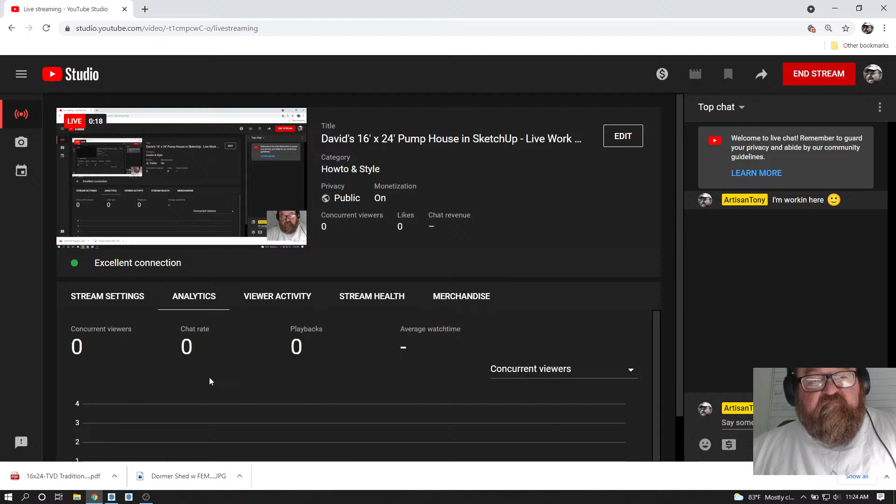So I've got to do this little pump house for David, and all he had was this kind of little sheet here. These paper drawings are kind of cool, and you can build by them, but it's much more fun and easier to plan if you have a model.

Much more fun. So what we're going to do is start out with Medeek's extensions here, because I like his extensions. Nathan Wilkinson's a really good guy, I've gotten to know him over the years, and he's an engineer who developed these extensions for SketchUp.

We're going to do a slab, and we're just going to come out here 24 feet. Ooh, what scale am I at? I'm way out here. Let's start over again. Let's just offset a line here. I must have been still in UFO mode or something. Let's go 24 feet. Oh yeah, we gotta zoom in way in.

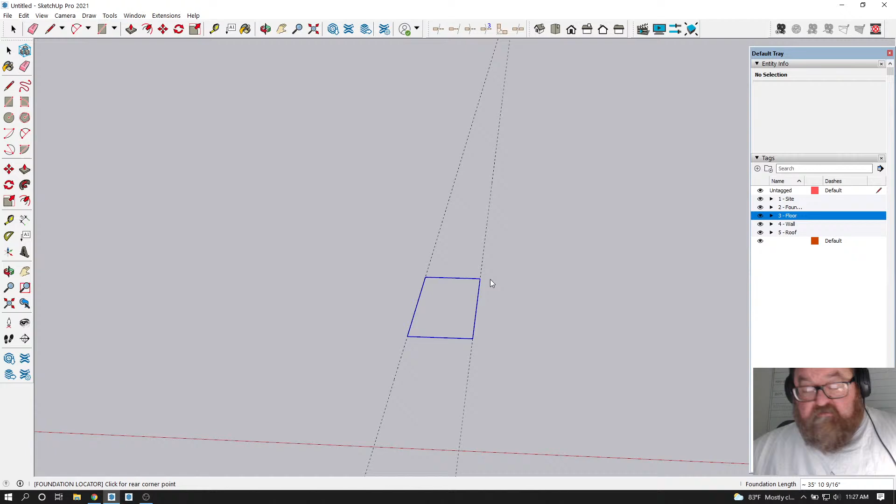So what we'll do is start over with our Nathan Wilkinson slab, and we'll do 24 feet. That would mean this is 16 feet. I was way zoomed out. That's ridiculous, isn't it? So we will start yet again. Is it Saturday morning? A lazy Saturday morning? I can't get my brain going. There we go, 16 by 24.

We're going to make it 12 inches for now, just for the fun of it - 12 inches thick, just to have a nice little base footing. I'm not going to pay too much attention to this because I can go back and change it. That's the nice thing about this extension - when I get ready to get into some serious detailing, I can go back and edit it and get into all the detail I want. For now, I just want a little base to start off on.

Now this is some sort of pump house, so it has a - sorry to go back to my OBS again, but I can't see where my video camera is, everything's backwards too. There's a cutout in the floor somewhere for the pump, I guess it's a well, and I'm not quite sure. I just got this project, okay? I'm still rusty on it.

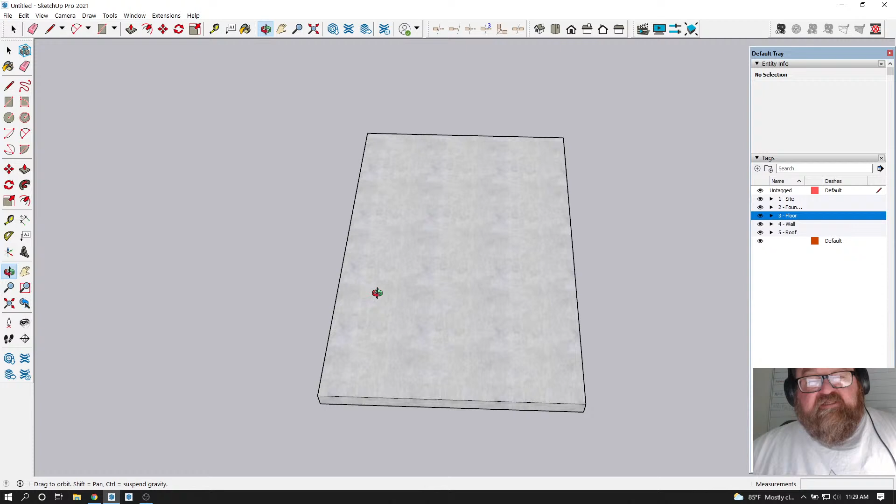So what we're going to do is ignore the cutout in the floor for now, and just do the walls. Now, let's see, I've never actually done a concrete block wall with Nathan's extension. So I think what I'm going to do is just draw - my goal was to do this whole project with his extensions, but I think I'm just going to draw the block wall for now. I can always come back and redo it because it's a small project and it would be simple.

So for now we're just going to draw us a rectangle, and then what I'm going to do is offset it 7 5/8 because that's how wide a concrete block is. And I know this wall is going to be 4 feet tall, so we'll just pull it up and then I'll get rid of that face in there.

And I'm excited because SketchUp 21 has come out with an update, and there's lots of cool little updates. Some of them have to do with your normal tools - if you look down at the bottom you'll see added extra features built in so that you don't have to change your tool as you're going. Like now the eraser tool has the softening, the edge softening thing built into it.

What was that? Was that the hidden line, or was that the rounded? That might have been the softening. But anyway, I need to go and watch the video. If you hit Control - what's the first one - toggle soften/smooth, and then Alt is toggle, undo that, and then Shift is hide. So if I wanted to hold the Shift key down, I could just hide that line. I'd still have my edge.

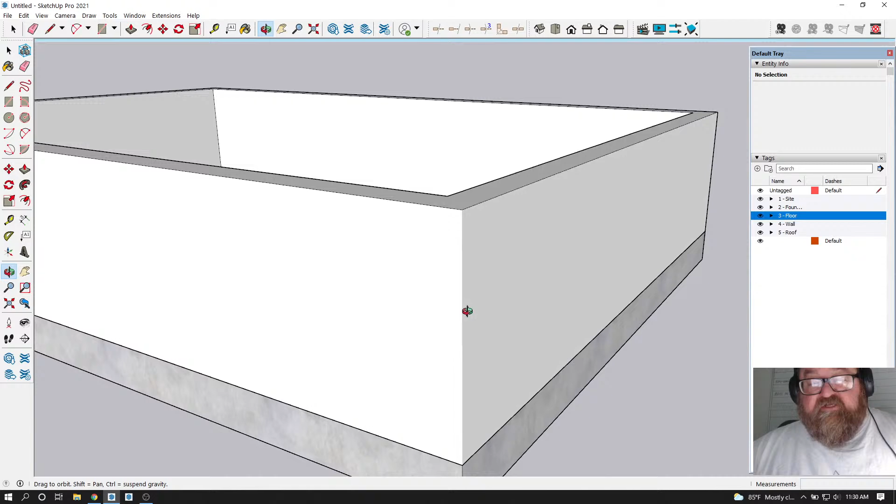That's a nice look, see, when you're modeling, but when you're drawing, we want that line. When we start printing drawings, I go out of this modeling mode into construction document mode, and my style will change. The background will be white for paper, but I like to draw in this mode because I like looking at the pretty sky while I'm drawing.

It keeps me chipper. So first thing we're going to do is make this a group, because we don't want anything sticking to it. I hate getting things stuck to my walls on Saturday mornings. Let's see if anybody is watching.

Oh, we might have 5 viewers. All right, so what I'm going to do too, just so I'll have a reference, let me go back and look from the top down. I want to make sure that's one thing your drawing axis does for you. As a matter of fact, I'm going to turn the drawing axis back on.

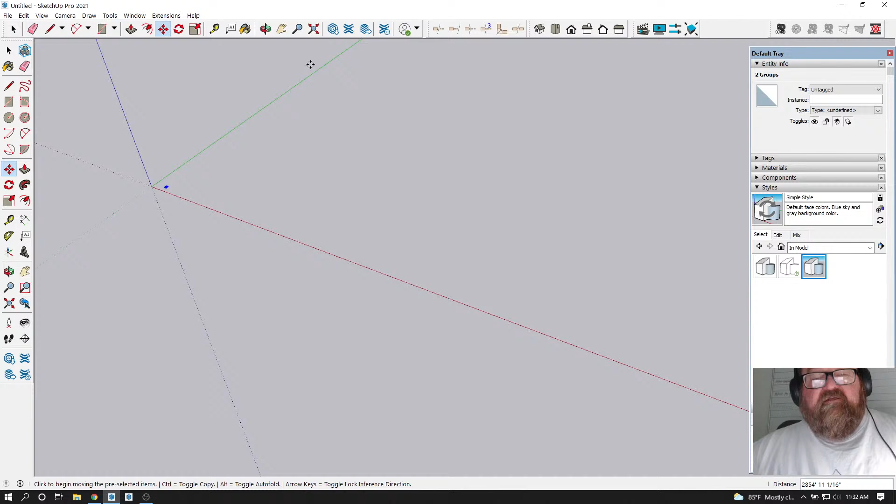And I'm going to put this over here, closer to a more logical place. And then I'm going to zoom to my extents. And now, if I need a reference point, I can tell as far as east, north, south, and west.

The reason that's important is because when you start dealing with your shading, you want to make sure you've got your building oriented in the direction it will actually be oriented, and this is basically what we're assuming at this point. But I don't work with the shadows turned on, because it slows my supercomputer down just a tad.

And what I like to do too is, I've got this other job. What did I do with it? I've got a job, let's see, yes, we need to start.

We need to go here and save this right quick. We need a new folder for Pump House. Always nice to keep your drawings organized. We're just going to call this Pump House for now. I meant to do this before I started so you wouldn't have to watch the boring parts of this.

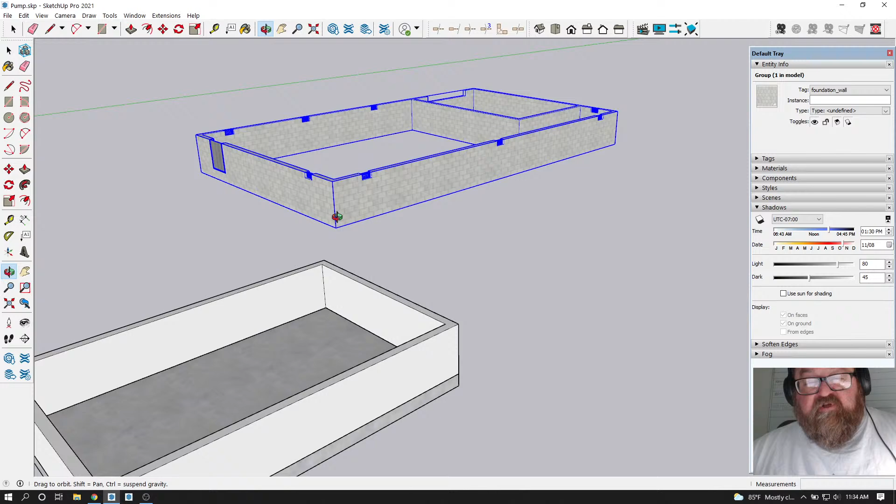And I'm just going to paste it in here for a second, because I want to get this hatch. I like this concrete block hatch, or poche. I'm going to select it, and bam.

Now, if you've got it set up properly, you'll see that the coursing works out, right? I've got this 4 feet tall, and there's your 8 inches. 8 inches should be your coursing, you see. So I like that hatch, it's got the proper scaling and everything to it.

And I can place it, it's just kind of a quick reference, because this project is below the floodplain, so we have to have flood vents. So what I'll be able to do, now that I've got this coursework in here, is roughly lay out where I want my doors and windows based on coursing. It's a visual guide, so I know to go here first and then type in 6'8".

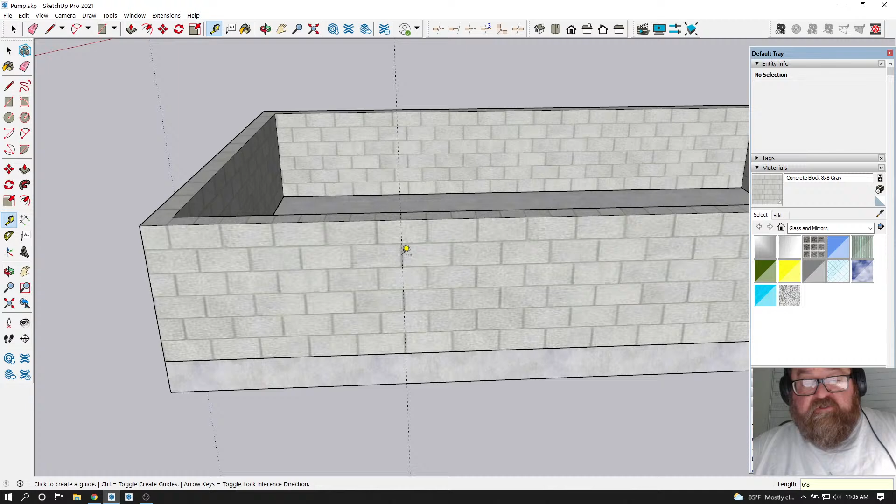It's just a reference, that's all. It's just nice, and it's pretty, like the sky - more realistic looking. So we go up here again, and keep in mind where we are as far as east and west, because this wall - well, I'll tell you what, let's put the walls on first. We'll do the fun stuff first.

Okay, so I'm going to go to the exterior wall tool, and I just want to set this up right quick to make sure. These walls are going to be 48 inches tall - no, 72 inches tall, because we've already got a 4-foot block wall and he wants a 10-foot total height. And so, 2x6, 16 on center.

I'm just going to roughly - one thing I do want to do is set the siding as vertical. I'm not going to use this T111 on this.

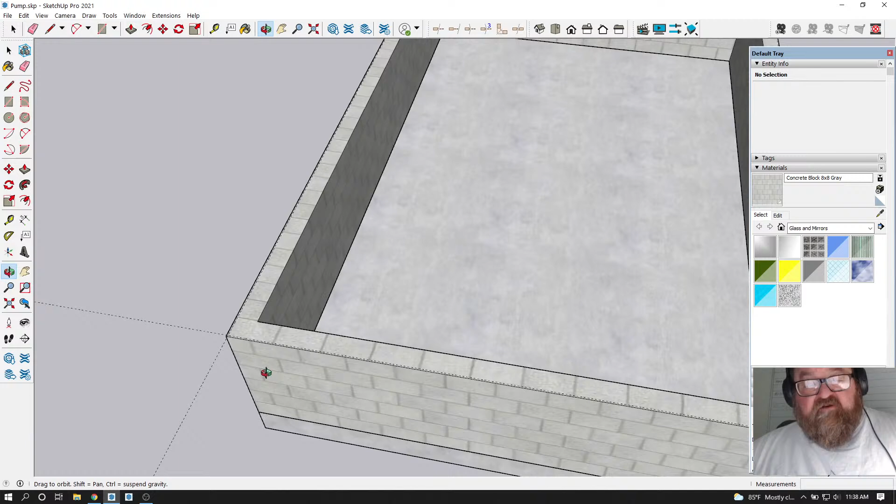But I'm pretty sure this backer I want to use is... did I lose my settings? I should have done that before. I guess that's okay, it won't take long to fix it.

72 outside. And all I'm going to do is change the OSB to DensGlass. I just want it to look different - I don't want it to look like OSB.

And then I'm going to look at this again. I just want to get most of this right before I draw all these walls.

So what I do is I set that wall back - see that line? I'm using that because he will add the sheeting to it, and I don't want the wall sheeting hanging over the block. I just want the siding to hang over the block.

Now see, if I had saved this - oh shoot. Let's look at the DensGlass. Yeah, that's cool.

But guess what? I want to undo that. Where's my... what was I going to change? Oh, the siding - I forgot to go back and change the siding.

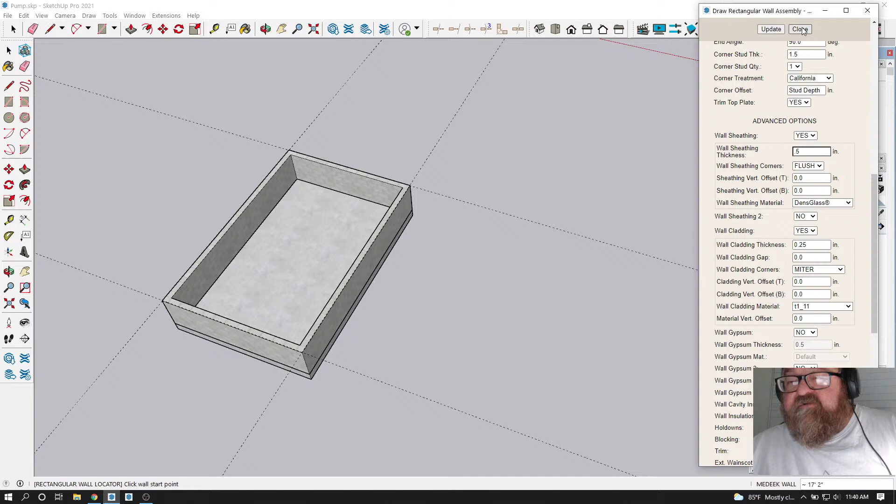Yes, it's Saturday morning and we're having troubles already. If I don't change it now, I got to go back and select every wall and change it. So it's quicker just to do this, just to try to get everything as close as you can.

Yeah, and I can change that color. I need to talk to Nathan about that color - we don't do pink siding in Tennessee. I'm just kidding, it's not pink, but it always reminds me of this mauve colored siding.

But this is going to work pretty good. Let's select that point right there, and keep those corners. That's pretty cool.

Let's see if we have any comments. This is exactly what we are building right now. Are you using Inventor or AutoCAD?

I'm using SketchUp - see up there in the title? Pump House in SketchUp, SketchUp Pro 2021.

Are you running this program on a Mac or Windows? Got a Windows, it's an MSI GS75 laptop with an RTX GPU 2080. My computer's less than a year old. I got the upgraded graphics card model for doing the animation work that I do.

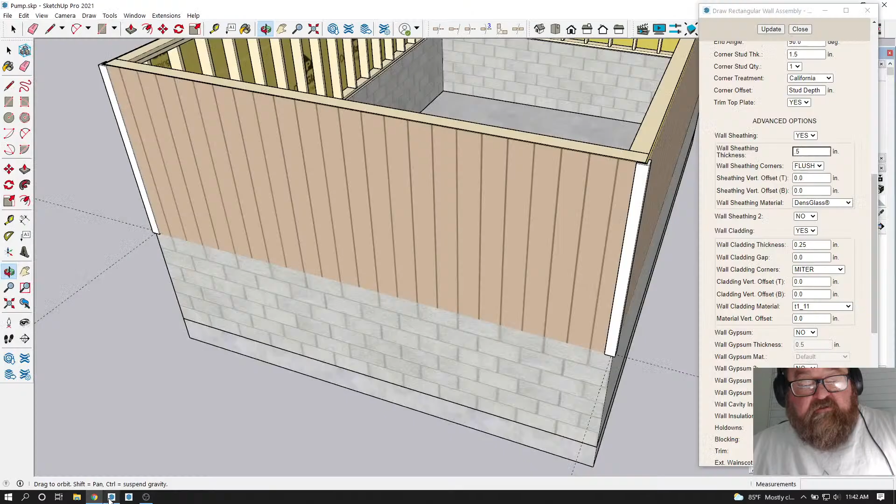I do some animation work and then I do some animation for fun, like that last video I did with the UFO - that was for fun, obviously. And thankfully there's no UFOs in this video because they're distracting.

But what I can say is I don't worry too much about the color of the material because I'm going to actually replace this siding manually when I get done. What I do is I'll pick the material and then just edit it - for now I just want it to be a more neutral color like that. See, that's less distracting.

And let's get rid of our guidelines. All right, so we're doing good. Now there's an interesting feature that's kind of cool.

I think I can do this with this Medeek wall. And I notice I don't have my treated bottom plate - dang it. But what you can do is you can go in here, and this is why I was trying to get this close as possible at first.

But see here, you can make your pressure treated bottom plate, yes, and then update it. But see, now I've got to select each wall.

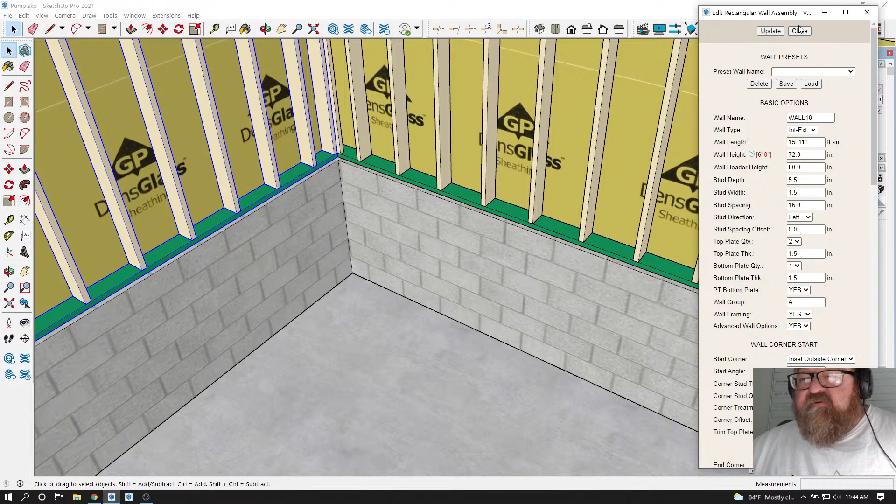One request I have for Nathan is to be able to come up with wall types so that if I go and change the bottom plate in that wall type, all of those walls of that type will change. It would be a huge deal if you forget to do something like this, because now I have to select each wall. It's no big deal on this project, but if I had a whole house with 50 walls...

But no complaints here, because I used to literally draw this by hand, every plate, every stud, every piece of siding. I have videos of me doing that. It's kind of funny, so I'm certainly not complaining, just suggesting any kind of future improvements.

And that is the other thing too, I like to take - and this might be a little anal - that green and make it more of what it actually looks like. I don't know, this is where you go down rabbit holes. So I'm just going to probably leave it alone and move on. I can play with that color later.

The point there is that when I'm estimating, I remember to order treated plates instead of regular pine for the bottom plates. No SPF on the bottom plates.

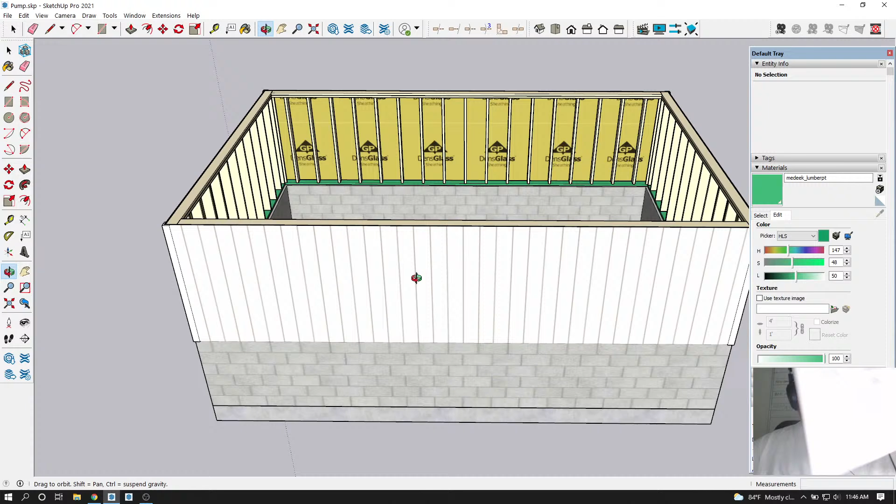Excuse me, for some reason I have a frog. I accidentally printed these drawings double-sided. I don't know how my printer got stuck on that mode, because I never print double-sided, but for some reason it printed, so now I'm having to flip this stuff around and look around.

So what we have is a door 2 feet over, so we'll go 2 feet, 24.

Now normally, what's funny about this is I normally do my two-dimensional plan first, but this was going to be kind of simple, so I thought I would just go right into the 3D part.

And then it's got 4'8" and 24. I may make these 24-inch windows a little bigger - he said I could take a little liberty with this. I may actually, but I'm going to lay it out the same for now.

So 2 foot, 2 foot, 2 foot - so 24, 24, 24 is the space, 24 and 24 and 24. And that gets us to the end, and there should be 4'8" left over. Yes, okay. Now this might be a little tricky because...

I'm going to test out the offsets of his walls, of his doors. I think you can do vertical offsets, which is kind of cool.

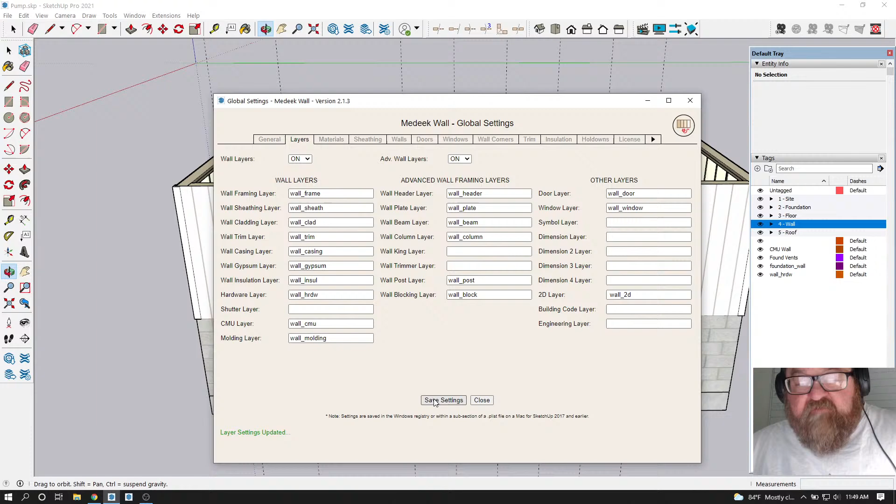I think if I take those out, that will actually happen. But you have to regenerate the wall, which is no big deal. I think I can select all of them and regenerate? I think so - maybe not.

Anyway, that just shows you a demonstration of the way you can - let's see, I can go in here and get rid of this and the trimmer. Some of these are just, it's getting a little bit - you want to organize, you want to have layers so that you can control the views.

But at some point it becomes obsessive compulsive. You have to have balance in your life when it comes to layers.

So let me turn the walls off for now, because what I'm going to do is create this door opening right here. I'm going to grab my pencil and my push-pull tool, and push that down, and that line right there should go away.

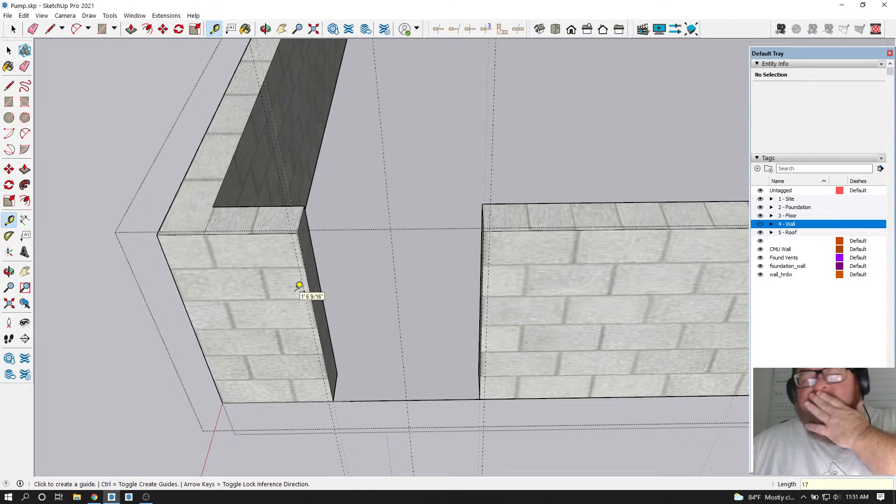Now here's the thing. I'm going to draw this the way it should be, because a lot of designers don't do this right. If I go to the center, a 32-inch door requires a 34-inch rough opening, so right away we're off by 17 inches on our block. Then I like to allow 3 inches for the framing, your trimmer, jack, and king stud.

So that's the opening you need in your block. If you want to show it accurately, do it this way; if you don't, then don't, but don't blame it on me when it's not accurate. I'm going to get rid of this little line, and that's the actual opening for our door. I'll leave the center line so I know where it goes, and get rid of the rest because that's not true.

Let's see if we have any comments. No comment.

Now I'm going to turn the walls back on. Thank you, SketchUp 2021, for having folders now so I can organize my layers. I'm going to go to the Medeek wall and door, and let's see if we can see a picture of this door. Now I'm just going to show a solid door for now.

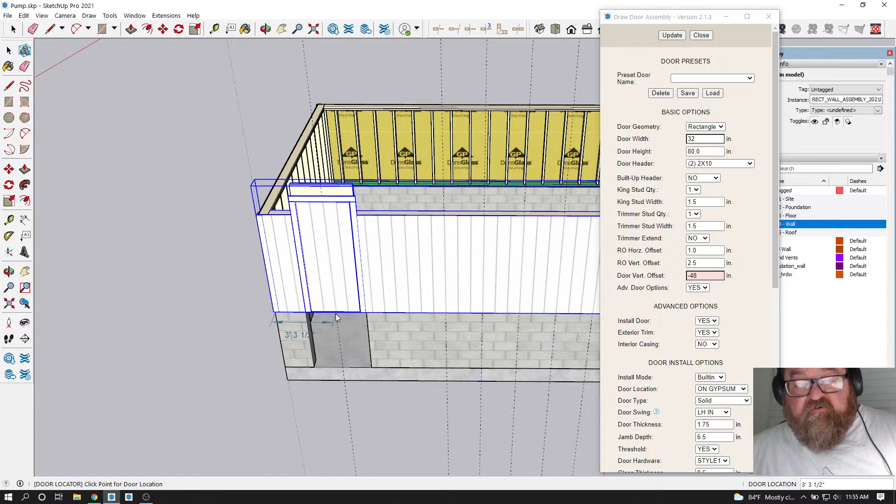What would be cool is for situations like this, if you could offset. You know what though, I can say—what if I did minus 48? What did it do? Oh wait, door, right there it is, door vertical offset. Duh, you just have to read, Tony. Let's see if that works. Door vertical offset.

Let's put 48, maybe it didn't understand negative numbers. Door vertical offset. Oh, now it's working. Okay, I think I just figured this out. Yeah, okay, sorry for the confusion because I haven't used that feature before.

Door, 32. We want double 2 by 10s. We want door vertical—I know y'all are probably screaming out there, it's right there, dummy, right there. Let's see if that's going to work. Okay.

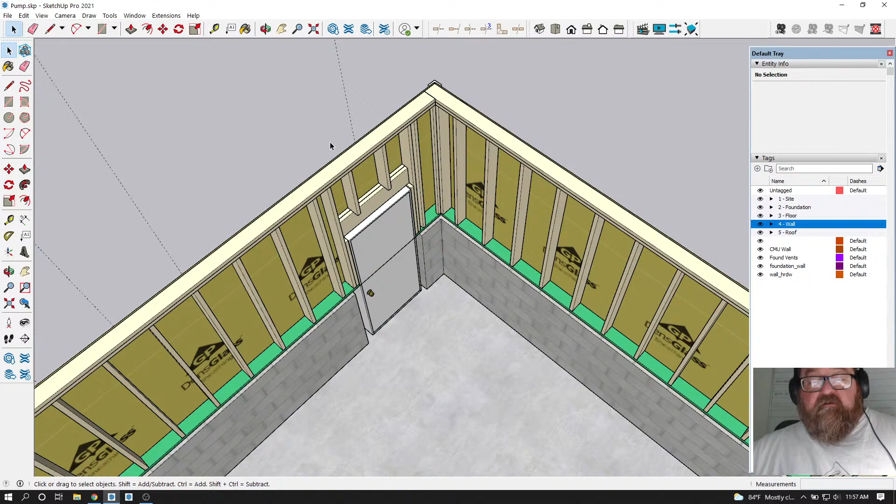Oh, that—okay, I see what it is. What is that right there? Is that just the 2D part of the wall? Aha, that's a feature he's put into the wall extension, where you can go to the global settings and set up the 2D mode, so that if you're doing a plan, a two-dimensional plan, it's there. You just have to set it up that way.

Well, that's awesome. Where's my framing? Yeah, what I'll have to do, no big deal, I'll just have to extend the framing down.

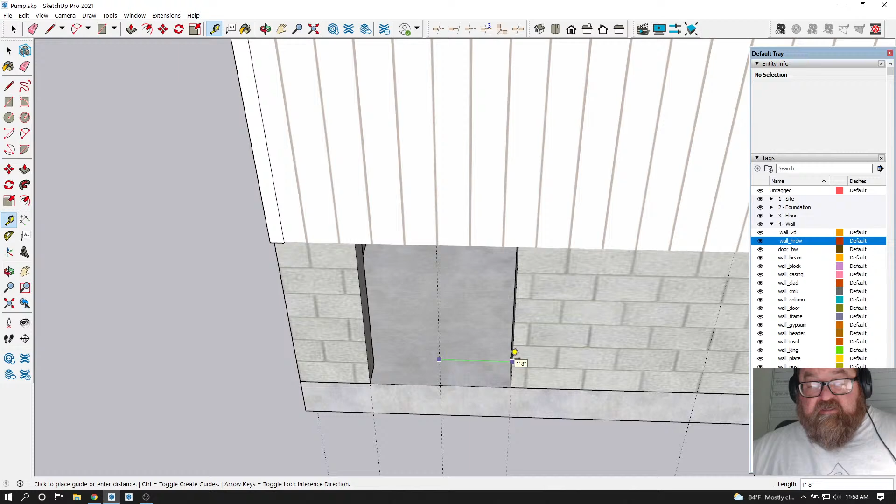And somehow I didn't get it centered, looks like. Let me do this again. I know I'm probably making you bored at this point. 1 foot 8 inches, but I've got to get this. That's actually...

There we go, and then we just have to turn off the 2D. What's happening is the wall is regenerating as I put the door in, and that's why I have to go back and turn the 2D part off each time.

There we go, awesome, awesome, awesome, and that's awesome. Let's see if we have any comments. Nope, I drove everybody away with my boring—yep, only one viewer.

Okay, all right, so that means I should not get into minutia while working. These windows now, I'm probably going to recommend that they just go right on that sill.

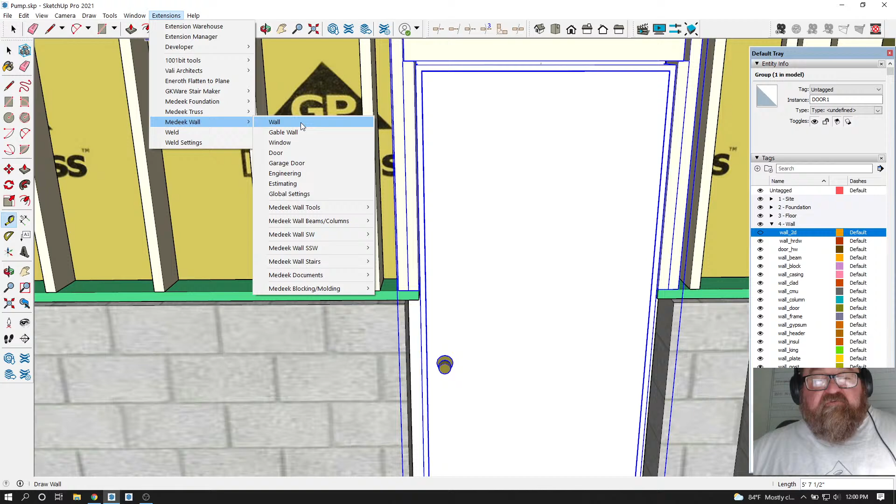For some reason, this door keeps wanting to be... why is it making the door 2 feet 9 and 13/16 inches? That's odd. I may just have to come back to this later because I don't want to spend a whole video on this door, which is turning out to be the case.

Let's see, wall tools, edit opening. I'm just going to look at it one more time and try to find out why. It says door width 32, and rough opening...

Let's put this back for just a second to one. I don't know why his rough opening is related to that, but it is. So that's what it is. So I need to leave his rough opening at there.

Now you can see those two, the trimmer, the jack, and the king stud. We call these jacks, but some people call them trimmers—basically the same thing. But now these two pieces can come on down all the way to beside the door, and I like that better than trying to squeeze the door into that masonry opening, because it also gives you something to nail your trim to as it comes down.

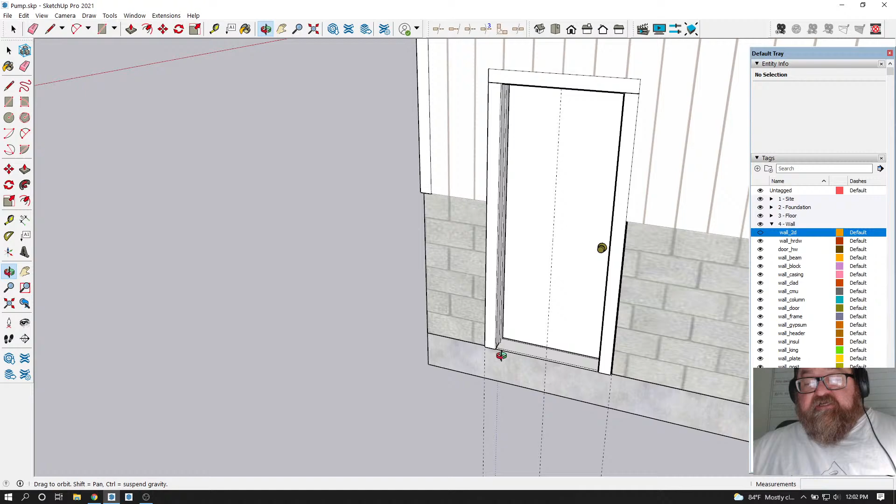So we have established that is our side, this is our front. And I think on that end there's no doors or windows. Let's go back to our top view here and we'll figure out these windows right quick.

What I could do, it wouldn't be too boring, would be to go ahead and put the roof on—the basic roof shape, which is a 10 and 12 pitch. So let's go to...

I think he wants these to be rafters. Roof rafters—here we go, gable roof. Okay, and we'll start on this.

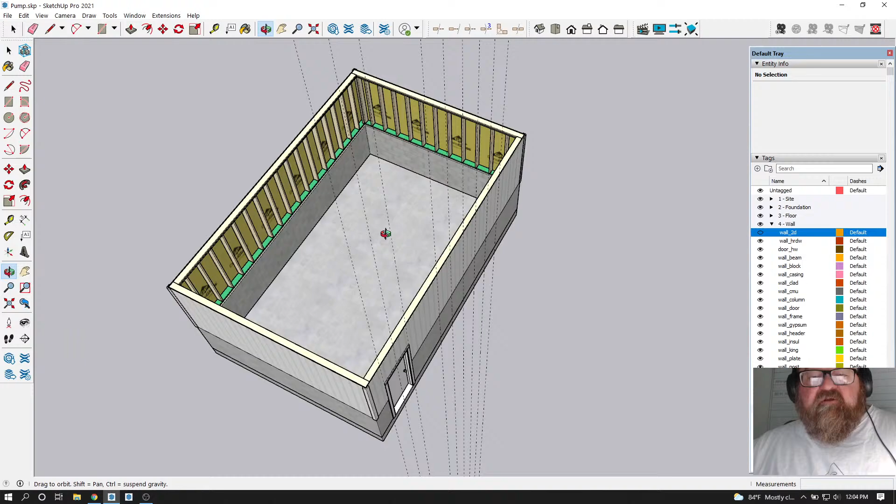Yeah, we need to start right here. We need to line that up with our framing, because we also have sheeting that goes on the ends of our gable, so we don't want it hanging over the sheeting below it.

We're going to change this to a 10-12, and overhang is 12. That's good.

Rafter depth, we're going to make them 7 1/4. We'll make them 2x8s—for this size building that should be fine. Ridge boards, 2x10.

And ceiling joist, let's see. Yeah, we'll put them in for now, but they're going to need to be 2x8s. Let's see, what have we got? Ceiling joist—let's go ahead and put them in. Let's see, he's got a loft, yeah, so we do need ceiling joist.

And I think 2x8 should be fine. Well, let's see, no—it is 16 feet wide, so we need to go 2x10s. Okay, and then rafter spacing is 16 inches.

And gable rafter depth. Roof framing, yes. Advanced roof options, yes. Okay.

So I'm just going to say, I'm not going to spend too much time on all this. I can go back and add that stuff later. I just want to kind of get this basic roof on to show you what it's going to look like.

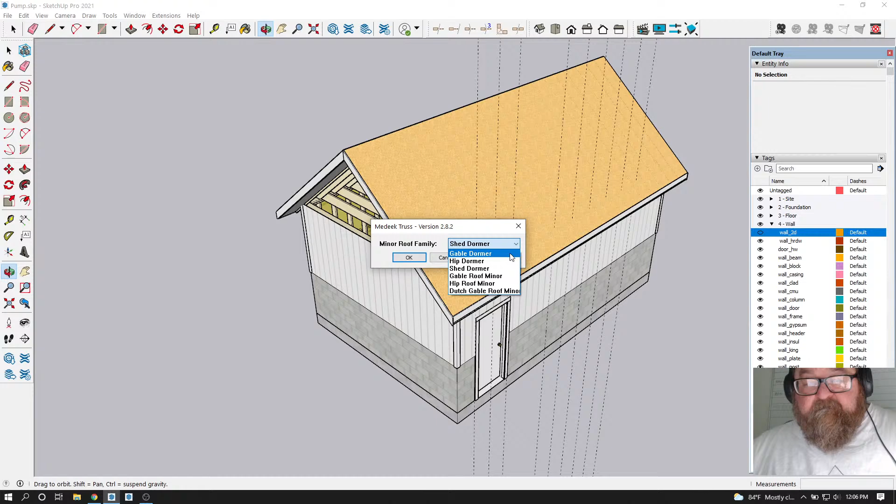Minor roof, gable dormer—let's see if you do a gable. Oh, he does a gable dormer. Well, thanks a lot. Let's see what that looks like.

Just for the fun of it. Yeah, well now, I could use this—I could use this for the sidewalls.

Yeah, because really all we're doing is putting on, if you can see, that little shed dormer. So we could just use that.

Yeah, so what I'll do is... oh, nope, I started to cancel everything out.

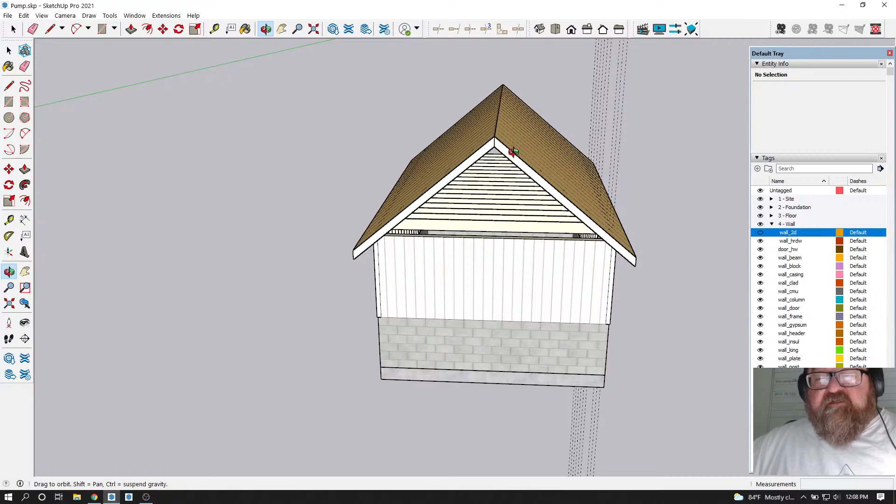So what I'm trying to figure out now is where he wants this dormer. Let's see, he wanted a loft up here, and he actually talked about putting stairs going up there. But I don't know if it's worth putting stairs going up to such a small loft—I mean, you don't really have any room to stand up here per se. Let's draw us a straight line down to here.

We've got 5'5", but that's in the very middle, so you'd be on your knees pretty much anyway. This dormer on this drawing is shown smaller, so what I may have to do is just put the windows in on the side and the door on the end.

And on the end of the thing, we've got a 6-foot door.

Yeah, so let's put that in, because that's something we can do that's easy and still make some progress. Let's come over here and go, what's that, 16 feet, and we'll go 8 feet to the middle, and we'll go 3 feet first for our 36-inch door.

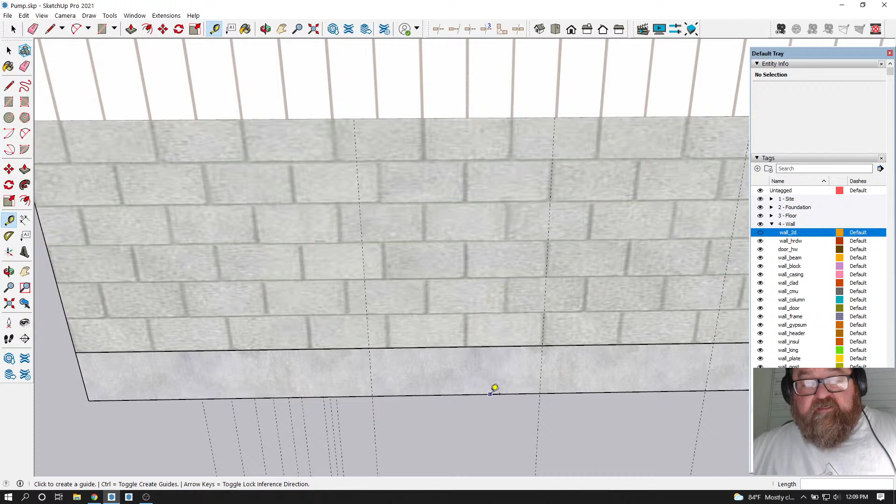And then again, I need to go, let's see, so overall I need to go another inch. I need to go another 4 inches on either side for the masonry opening. I'll turn my walls off for a second to make this easier.

And that's good. That is actually a good dimension, because you can see it works out on block work over there. I guess it doesn't work. Oh yeah, it does. It does work out right there.

Why is that not disappearing? So that is our opening, and get rid of these guidelines. Did I just delete guidelines over here? No, good. Okay.

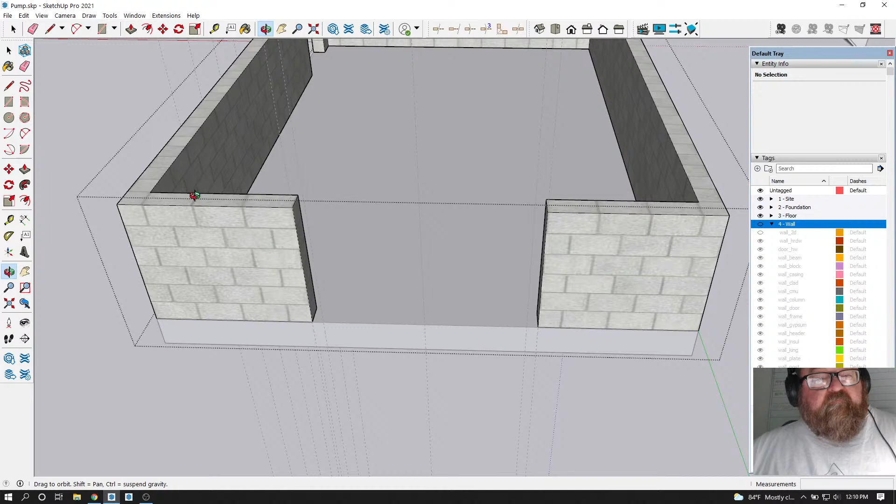So that is our door masonry opening. Let's turn our walls back on, and we'll use the same trick we used on the front one with our 48-inch offset wall door. Let's see, wall door. This one's going to be a 72-inch door, but it's going to be a double, solid for now.

And where's our 48-inch? 48-inch. Update. There we go.

Very handy. Let's turn our roof off. And oh, I gotta put - now see, this is where you gotta manage some of your layers. When the extension created the layers, it didn't know which folder to put them in, so now I just gotta put these in the wall folder, CMU wall.

Put that in. I think I can delete that, excuse me, because I think that was one I actually copied in here. Foundation vents - I'm gonna save that layer for the flood vents we have to put in. And foundation wall, put that in foundation now.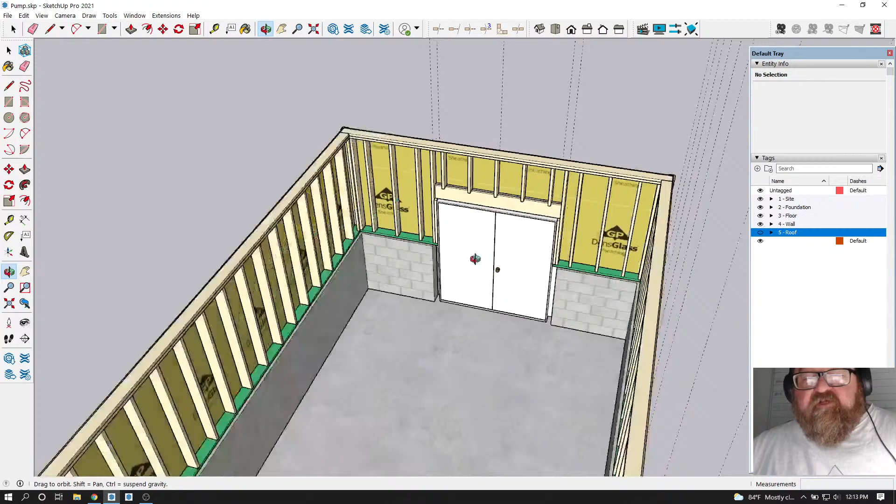Yeah, we'll have room for - I'm not gonna alter these walls. If you leave the walls alone, you can still edit them, right? I can go and edit wall assembly, see? But if I explode it to be able to run these jacks and trimmers, or the trimmer and king stud all the way down, then the wall will be exploded, and I won't be able to update the siding and sheathing at that point. So I'm going to wait - I usually wait till the very end before exploding these walls, but I usually do end up exploding them to make minor adjustments.

And we don't have our roof. Let's see if we've got roof cladding. We must not have turned it on. Let's go to roof cladding material - yes. But I'm going to turn on the corrugated metal, and we want that extension to be like 1.5 inches. So let's see, we want a ridge cap, yes. Gutters, no, not at this time. Update. There we go, we get a pretty little metal roof put on there.

And then we got our soffits. We need to adjust our fascia board and our rafter cut for that kind of thing, but I'll do that later.

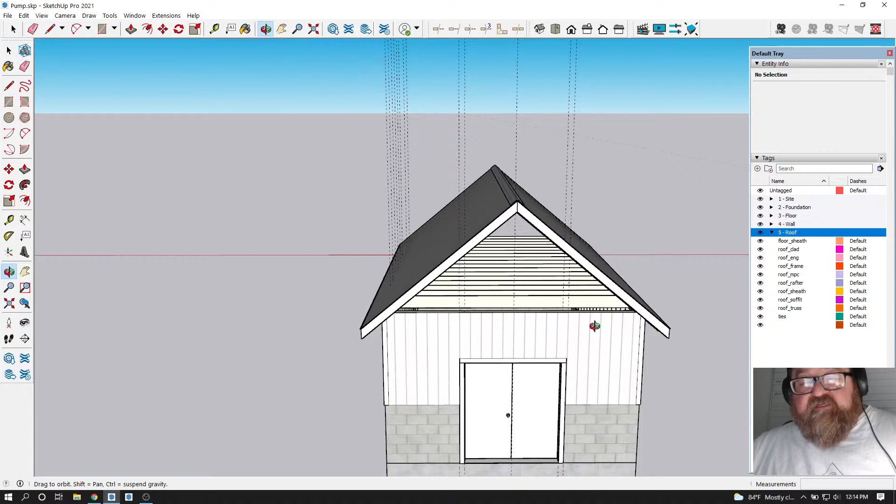Let me put these 3 windows in, and that'll be all for this for today. Turn the roof off for a second, because what I want to do is propose these windows to be a little bit bigger, since it's not going to cost that much more, and I think it would look better. Let's go 12. What I'm going to do is get rid of some of these lines - I'm just going to put a center line.

That's how my extension works. That's how the extension rolls. Fingers falling asleep for some reason.

Right, so we have our 3 center lines there. Let's go to the Medeek extension wall and do a window. We'll have to fix our offset, but let's see what size windows they have. I really don't want to do windows that just barely come down into this wall. I think a 4-foot sill height would be fine.

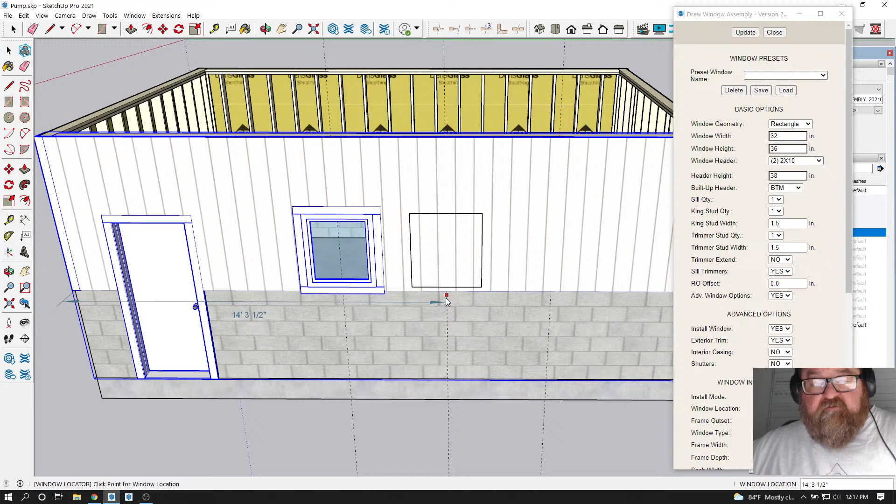Yeah, that's what I want to do right there. I don't want the trim overlapping the block though. But there's only 3 windows, so I can edit these easy enough. What I was trying to do is get a window close to the same height as the door, but that would sit on top of the block so we wouldn't have to notch out the block just for windows. The idea was to have the window sill be the rough opening, which looks like it worked out pretty good actually.

So I'm going to leave that like that, and then I'll be able to show it to the owner. And I don't understand the symmetry necessarily. If I was doing this, I probably would have set up a... let's see, 1, 2, 3, 4, 5. I probably would have divided the 24.

Yeah, see, I would have done it like that. I really wish I had thought about that before I put them all in there. But it wouldn't be too hard to change now that I've trained myself on how to do this. Let's put a line, a reference mark at each of these. Is that right?

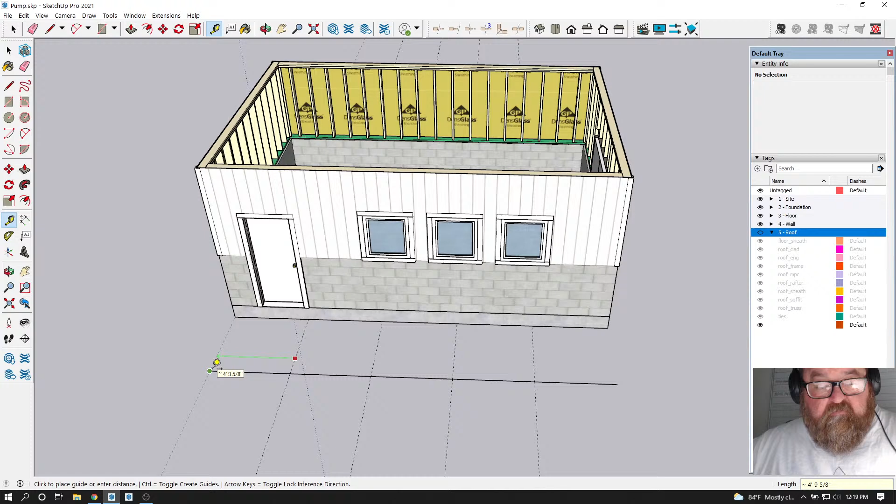Yeah, so this should be 4'9". Let's delete these. Delete opening, which is kind of a cool little feature. Let's go to wall tools, delete opening, and this is going to be easier than I thought. Delete opening. Now I'm going to put these windows back in.

The windows, I think, save this previous setting that you do. Yeah, except for the header height, 36. Oh, that's right, we want this to be 32. None of it was saved, was it? 36. Update. Yeah, that's what we want.

So I'm going to put one there. Window height too tall for a given header height, okay. So why didn't you tell me that before? Header height, window too tall, okay. Well, you're doing it. You're fussing at me, but you're still doing it.

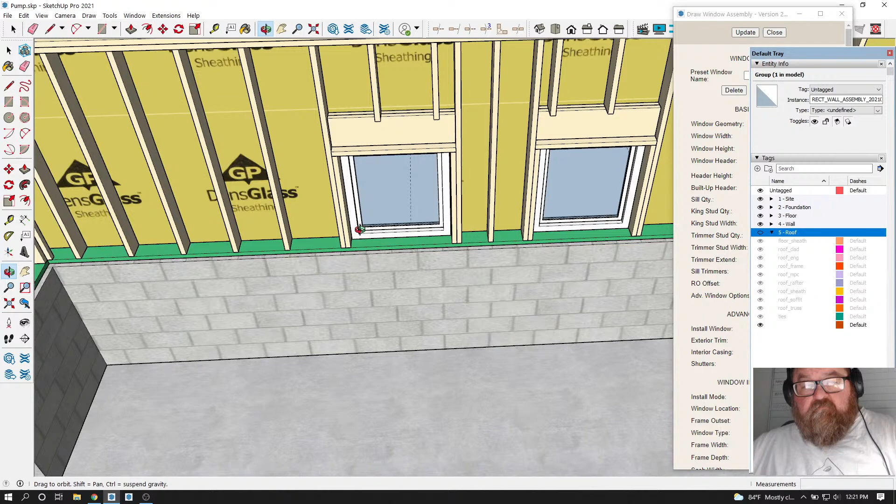I think what it's saying is that it's using... yeah, that's fine, that's the way I wanted it. Right there, except that header height. Oh, I think I should have said 37 instead. Let's undo that. Yeah, a little bit of trial and error here. Why is that not undoing? I will undo you right now.

Let's see, wall tools, delete opening. Okay, now let's try 37. Window 36, 32, 37. I think I made it 38 before. That's why I didn't get the message. I guess I'm going to have to make it 38.

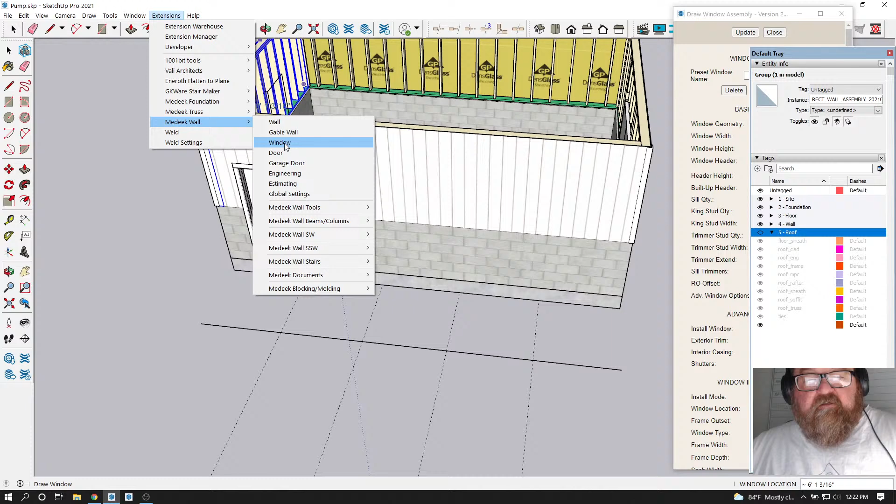Okay, which was intuitively what I did before, but 32, because I want it to be the same as the door, 36, and then this would be 38. It actually makes sense because your sill is 1.5 inches, so you want that to be 38. There we go.

There, now we've got this nice... oh yeah, I think that's going to work out better, because now I've got to move the door, but that's okay.

Let's turn off our wall for a second. And see, that's weird because I don't have a... yeah, we want to fix that. We want to go back, and this is why you don't want to mess with the stuff too much, because I need to go into the global settings and put back in the wall.

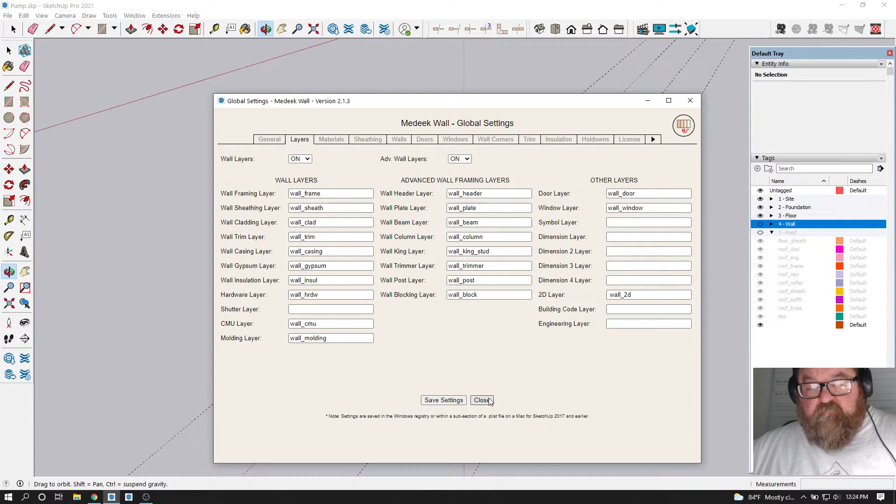What do you have? King, and then I'm going to go ahead and put stud, just wall trimmer. That should go back, that should go back. And we're going to save those settings, and close this. Now we'll turn this back on.

And then I'm going to regenerate the wall, which will generate the layers. Regenerate the wall, and then if I turn off the wall now, it should all go off. Oh, I know what it is, these now I have to put these in the wall folder.

There we go, and now I can turn it off. That's what I want, keep it organized. Do we have any comments? No comments?

So what I want to do is move this opening. I like this door being moved over anyway a little better because I don't like it so close to the corner on my block work. I like having a decent corner. And I'm going to draw a line in here temporarily just to be able to have a reference.

What happened to my line? There it is. There we go.

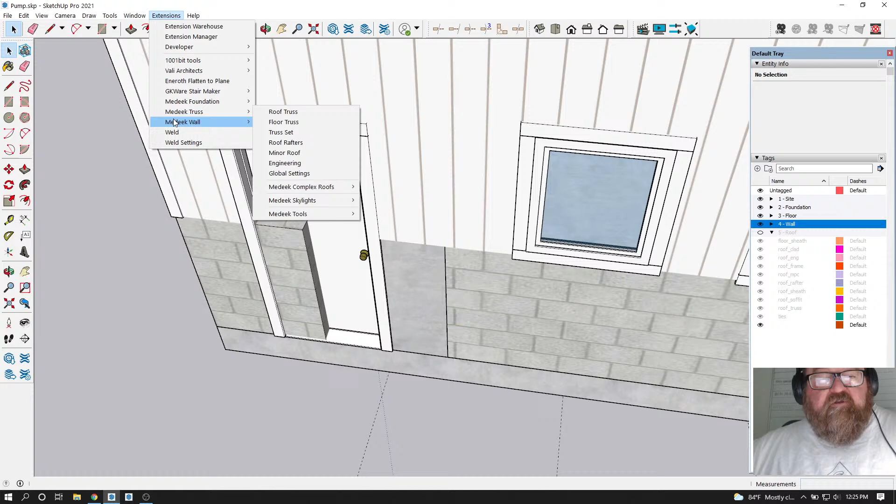Now all we have to do is move our door over, and I do have this move-the-door-under-wall tool, but I haven't exactly mastered this yet. Is it 12? Okay, well that's the right direction, but I haven't kept up with the actual. At least I know how to do it.

This needs to go. Let me get my axis locked. There we go. I need to go over 5 5/8. Okay.

So what we should be able to do is go wall, move opening, select it, and then go 5 5/8. Atta baby.

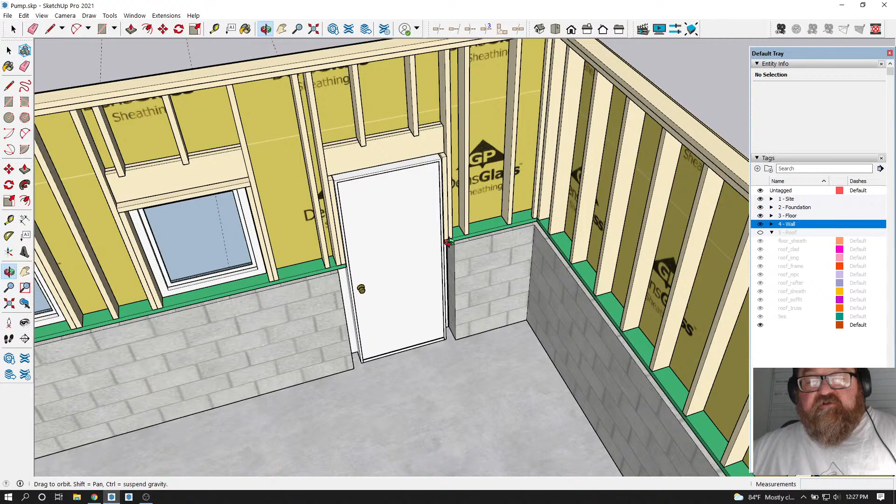And that's kind of a big deal, because otherwise I would have had to move everything and cut and adjust everything. Once I get to where I can explode these walls, I'll run those trimmers and king studs all the way down, and put a little plate down there for that.

Now see, I like that better than what this drawing had. He said I could take liberty on the design, so you can see what they had was the windows closer together and not really centered. Now what I did was I created 5 equal spaces, which I think looks better.

And if we turn the roof on, yeah, I think that looks much better. And it also gives you a nice corner here. You don't want a little wimpy corner on your block work—you want a nice full corner here.

So now we can get rid of the spacing guides we came up with. Get rid of that, erase, and there we go. It's getting there.

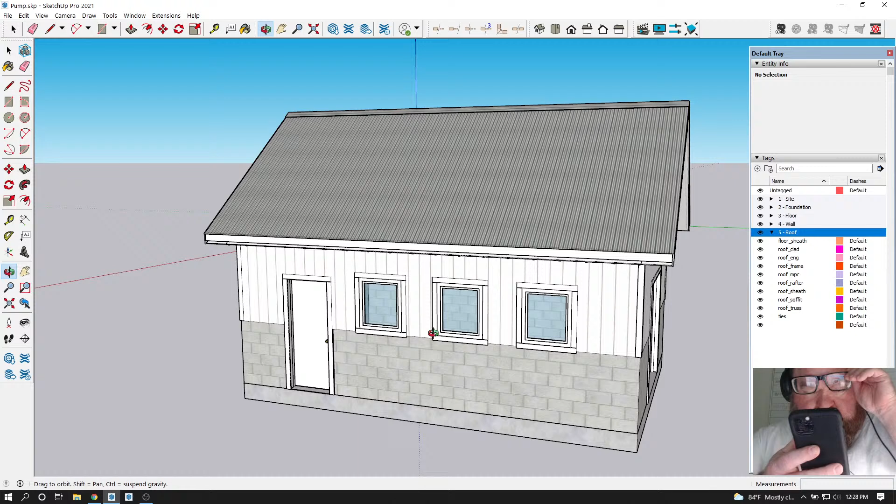Somebody's trying to text me. This is the guy who had the UFO at his house in Idaho. It's a house I'm helping Mark with in Idaho, and I was working on his project yesterday, and a UFO popped up in SketchUp. You'll have to go watch my previous video to see it—it was crazy.

But I do want to fix this soffit thing, because on these roofs in this extension, you have to call out the cut on the rafter tail to make the soffit work. And why is that not... okay, for a minute I thought I had accidentally made it so I couldn't edit it.

So what we want is a sloped soffit. And somewhere down here: soffit top angle, soffit thickness, fascia depth.

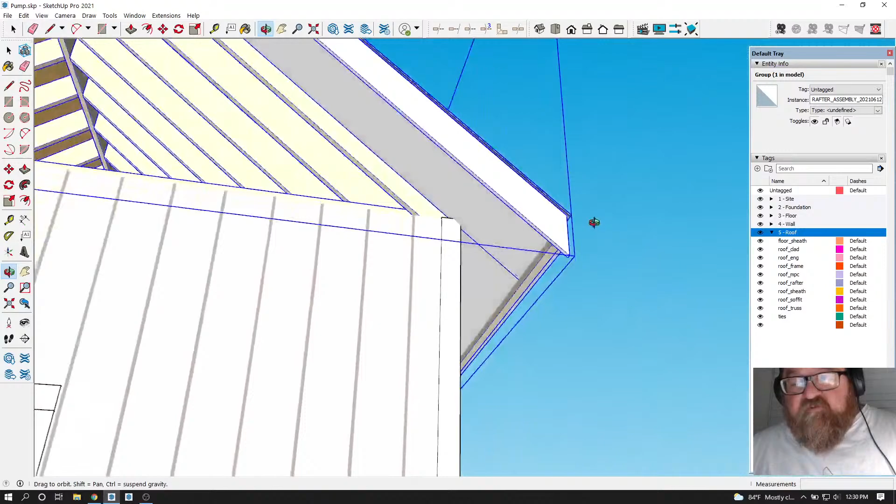And it looks like our fascia board on the end—which I can fix—our fascia board, for some reason, is too narrow on the front. So let's check that parameter: edit rafter assembly, and we'll go.

My eyes start to water if I look at this too much, because it's kind of small at this resolution—well, small for an old guy like me. But let's see if we can find fascia. Subfascia is 5.5. We want this to be 3.5. Update that. Yep, fixed that.

Well, not sure—oh, I see. It's just not lowered the way it would be in real life. We would drop this; we wouldn't hold that. Yeah, 5.5, and then this is...

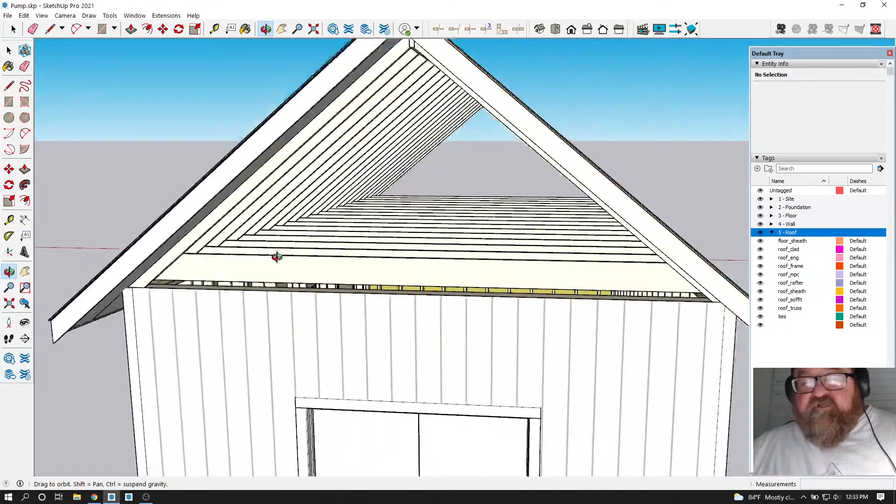And so now this gable wall, what kind of mess do we have going on there? I think what I want to do is ask him, before I get too much into this dormer, because I want to make the dormer bigger.

I would like to make the dormer almost big enough to put windows. Now, since I've got this 5-section thing going on here, I want to make the dormer big enough so that I could put 1, 2, 3, 4 windows up there. I don't know if you can see this.

The dormer's real small. This is one thing, the reason I changed the spacing on these windows and doors is because the door was funky anyway, it didn't really line up with anything. So it's not that I'm anal about symmetry, it's just, you know, why not if you can? And I don't see any reason why we can't. But what I want to do is get that straightened out.

Let's see if we have any other questions or comments. No, everybody's kind of chill today.

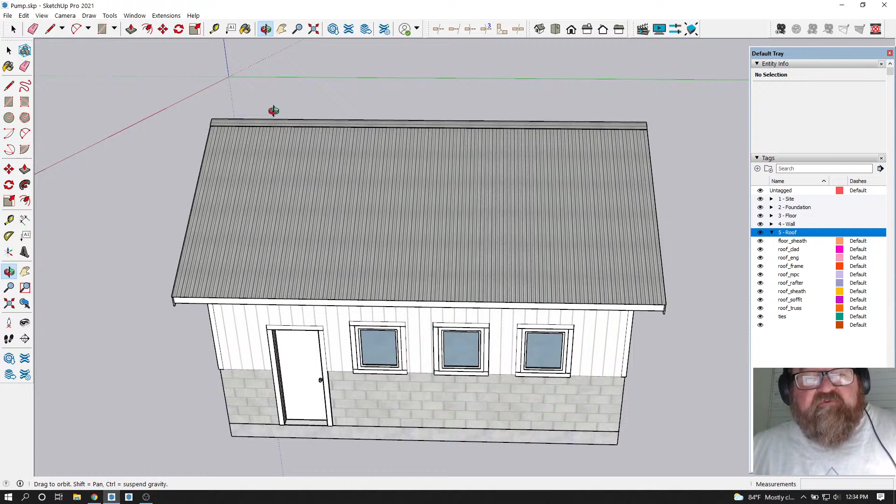But what I want to do is lay this out. What I'm going to do is suggest coming over, let's see, what is that? I'm going to come over 2 feet, 24 inches on each end.

And where would that start? Let's turn off the roof for a second and let's draw a line where, because we want this to line up with our framing, see?

So what you would have is a well, and as a matter of fact, you would want the 2 feet to be from your framing, because that's what you're going to do first. And when I'm telling the carpenter how far to come, I just want to say come 2 feet over from your wall, and then I can draw a line straight up as a reference for where that is in the plane of the roof.

So if I come over 24 inches and draw myself another line straight up, I get to where I can see straight up to the blue axis. Then I turn my roof back on. You see, now I've got points I can select. And let's turn off the roofing itself, the cladding, so I can see the decking. Now we're getting somewhere.

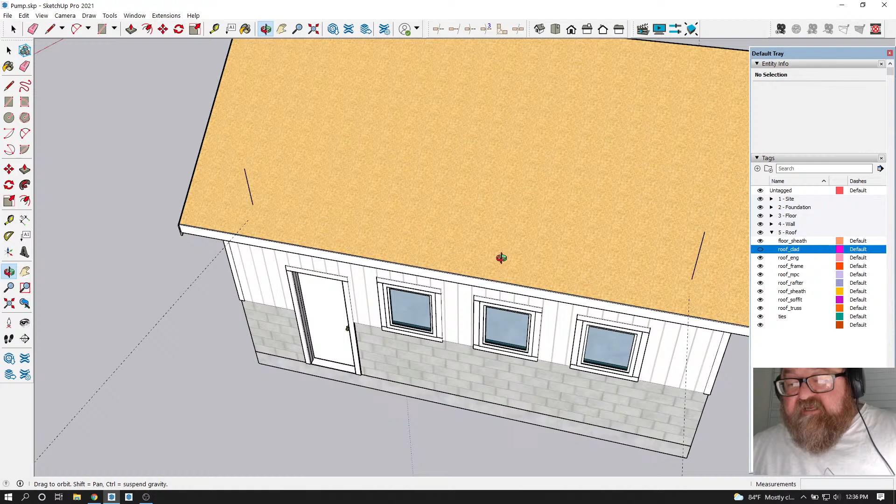So if I go back to this roof and do a special minor roof, it says gable, but I noticed earlier I can use this gable option even though it's a shed. I can just do away with the gable part of it. So I can go there, and I can go here, because really all I want is the walls, which are a pain to do.

So that's that, wall height. I guess I should have checked the wall height first, shouldn't I? 96 - yeah, I should have done that. So we're learning what we have to do before.

So let's start a new one. Let's go up here and we'll start from here and go up flush with, where's our ridge board? Let's just turn off our decking for a second.

Our roof decking, roof sheeting - let's just do away with this one. I like to call my wall sheeting anything vertical sheeting, and anything horizontal decking. It helps you delineate it when you're asking one of your guys, hey, go grab that piece of decking or sheeting - they know what you're talking about. Because your decking sometimes is a little thicker.

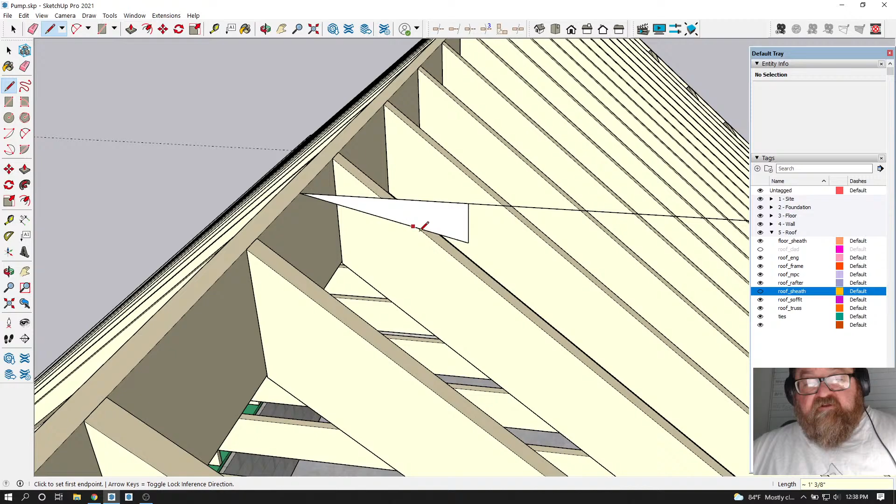So we're going to reference the top of the ridge, and then bring this over to that point. Now he wanted a 3-12 pitch, I think is what he said. So if we go over 12 inches, let's go over 12. Where'd that go? There, and go down 3. We draw a line back here, and then extend that out.

You'll notice that line, that reference went purple, or that magenta color - that's SketchUp's ability to inference the continuation of that line I had already drawn, which is pretty cool. So that's a 3-12 right there. So if we want our roof to be that pitch, that would be the top of the rafter.

And we could use 2x6 rafters for that - we'll go ahead and use those, probably could use 2x6s for all of this, because we're only talking about an 8-foot span. Let's see what the effects are of just changing this to 2x6 rafters - 5.5. I should have checked the rafter span table first. Yeah, you see, what that did was it lowered it a little bit, which is fine.

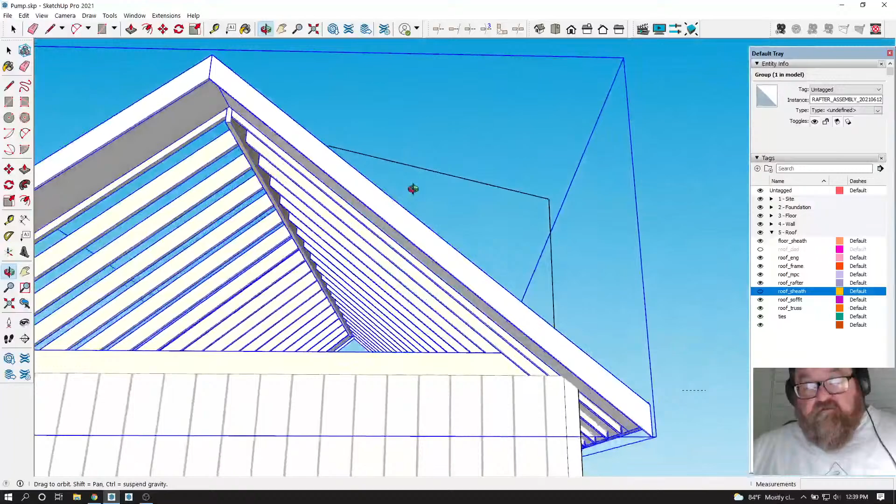I don't want to mess with that. Well, yeah, okay, that's what I can do. I can play with this because I didn't really want to lower the roof too much, but I still got to deal with this fascia board thing. Rake board, okay.

This ridge board can be a 2x8 now. Rafter depth, rafter width, ceiling joist - we're going to keep those at 16.

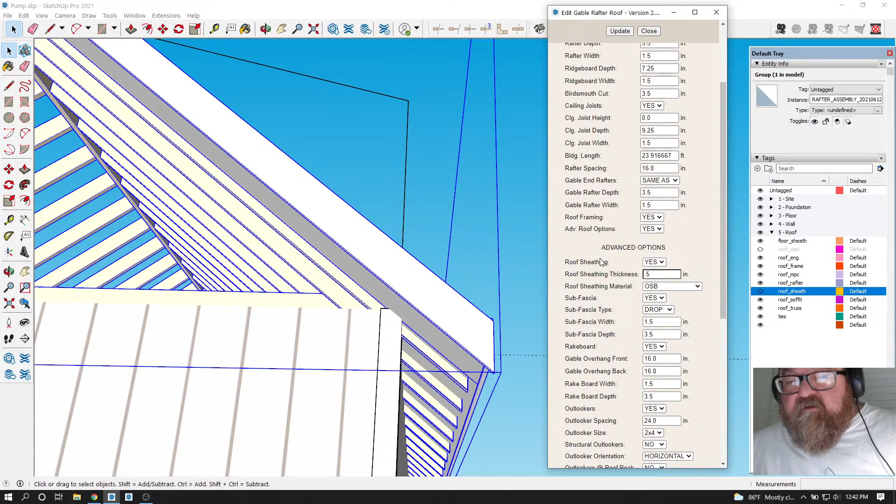Alright, well, again, I'm wasting time on it. I'll go back and figure out why those - I had it fixed before, but I'll fix it again. But what I'm going to do now is just take this point and lower it, because I know the pitch is right. I'm going to take this and lower it to there.

Where's my blue axis? There it is. I'm going to lock that and put it back down to there. The reason I'm going through all this trouble is because I want to know how tall my wall is going to be. And now, see, that's my rafter, and I know my rafter now is going to be 5.5. And I can establish now how tall my gable wall is going to be.

Turn the roof sheathing back on, because I think it's going to figure the height from here. Let's see how tall that is. I want this to be a couple of inches taller. So 4'1" - if I go 4'3", let's do that. Okay, all that just to be able to figure out - we would have had to do that anyway. So let's do this.

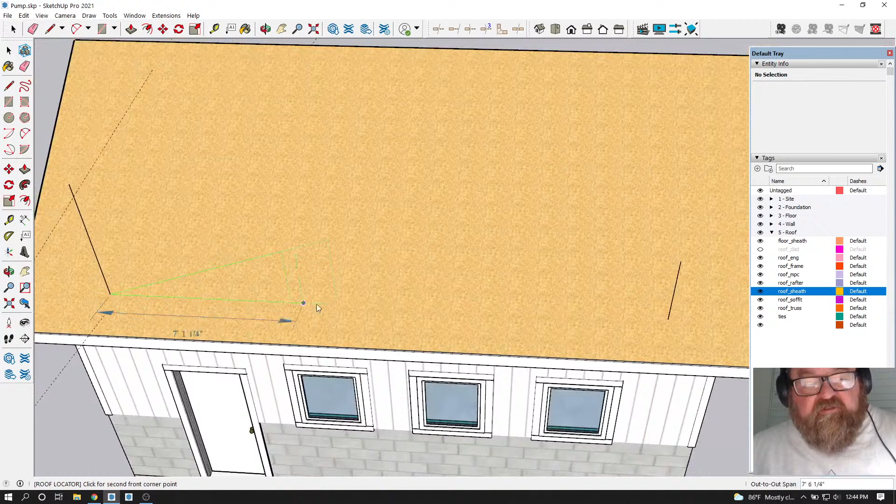Good thing I'm still checking. Oh, I see, I'm on the wrong thing - minor roof. And then I checked to see if you had shed dormer. That's what it was, and you said coming soon. So then I went back to minor roof, and let's see, if I do gable, that'll put my walls.

But that'll give me my front wall, so that's good enough. That's what I'm just looking for, a little extra help here, and also trying to get familiar with some of the extra functions. So now we know we can make this 51 inches - that was the whole exercise.

And rough opening, wet window, rough opening. Okay, I don't want a window there. But the only thing is what we would do about the difference over here - still this is going to be a big help, because I can just get rid of this and frame these up to the rafter. But I don't want that window there.

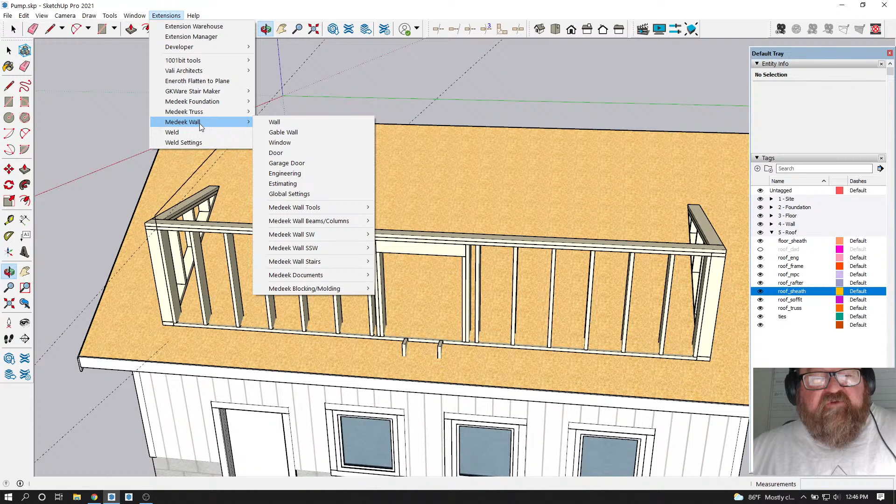I don't know why it felt like it had to put a window in there. So I'm going to go to wall tools and see if I can delete the opening. Well, duty - can I not do without a dormer window if I want to? And if I do that, is it not treating it right?

Okay, I'm selecting that. Selecting that. Window - why do I have to have a window?

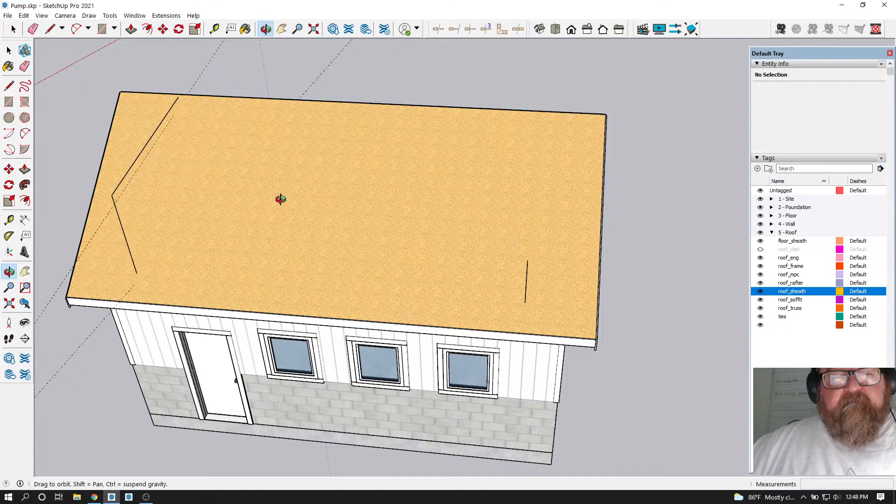Let's see if we go into our advanced options, if we can - whoa, baby, that is bizarre. We're going to undo that, and we're probably going to go back to just doing the gable. That was bizarre, wasn't it? That was almost scarier than seeing the UFO in my drawing yesterday.

Roof rafters, let's see, minor roof. We're just going to do the gable one, and then what I'll be able to do is at least use the... And we're going to say no to this. And so what we can do is just at least use the parts that I have been given.

So I'm going to explode this right away and then do away. Let's see - explode, yeah, and then just do away with this. But what I have got - why are these things sticking up in the air? Let's turn off the roof for a second.

That's weird. Now I have experienced these little faux pas before. And is that a flat plate on bottom? Yeah, now see, you know what we might do is just go to a regular wall.

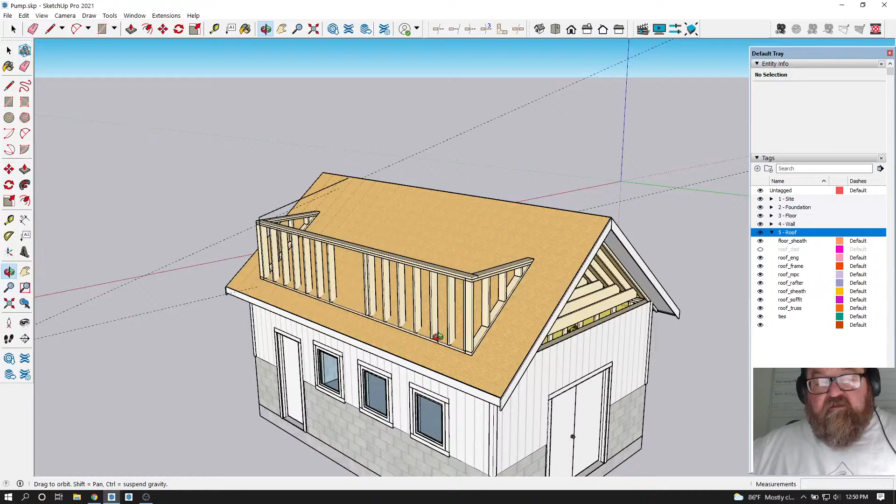I've got, what I'm trying to do is get used to using the Medeek wall, or wall and roof extensions. But what I'm going to do is put a window above each of these. And what I may do is go back, because the way this would actually be framed is this wall would actually be framed on top of this wall, framed up to that height. It would probably also be just a standard height, like 4'8", something like that, we'd pick out something standard.

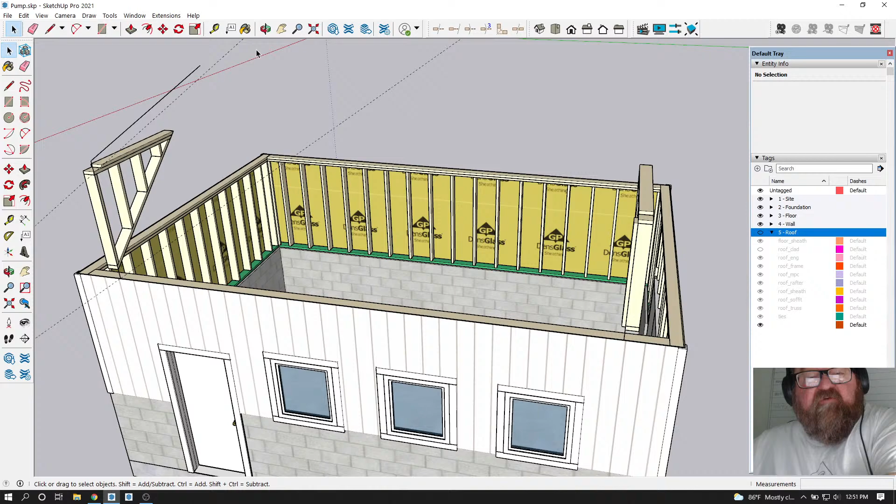So what I might do is just get rid of this and save the little sidewalls, which would be where they are. Because even though this wall would be framed on top of the other one, the sidewalls would be framed on top of the decking, like they are, like that, see? And this part would be gone. What you would do is, I'm going to leave those studs there.

What did I just delete? Oh, that's okay. And then after I get my, yeah, so what it amounts to is it saved me a little time. Well, what it did was it got me familiar with how the roof extensions work together, and you can't complain about learning anything, right?

So what I'm going to do is put a wall, although this wall is not in the right spot. That is 24, so that is supposed to line up. Isn't that weird? It's a good thing I checked it, huh? Was that a group? Nope.

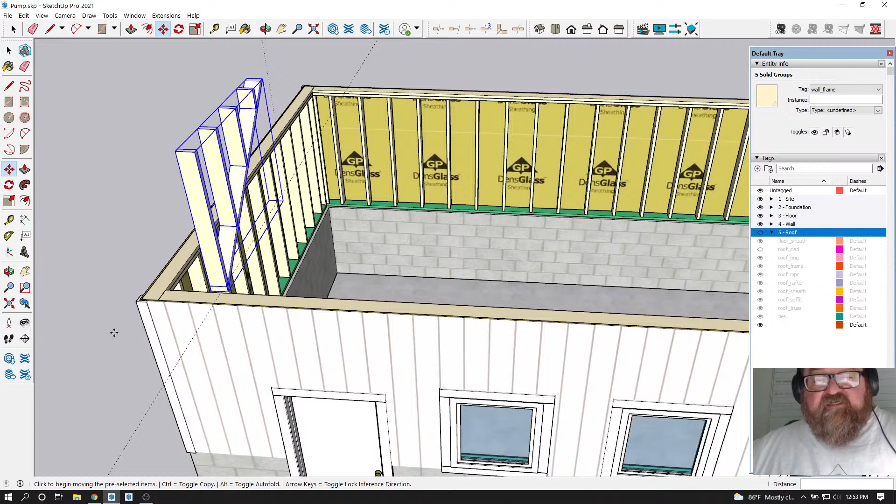Because what I wanted it to be was 2 feet. Let me get my axis locked. I want it to be 2 feet to the outside of that wall, not the inside of it. Learning about the extension. So I should be able to just move that over 3.5. Oh, 5.5.

I didn't. These little sidewalls don't have to be 2x4s. So yep, I didn't want to get rid of that. Yep, get rid of this little, that thing.

Now what I can do is I can draw myself a wall that is, yeah, 4'8". Draw a wall.

And I guess I will keep this at 2x6. This would be 56 inches, 4'8", 56. And we'll just update that.

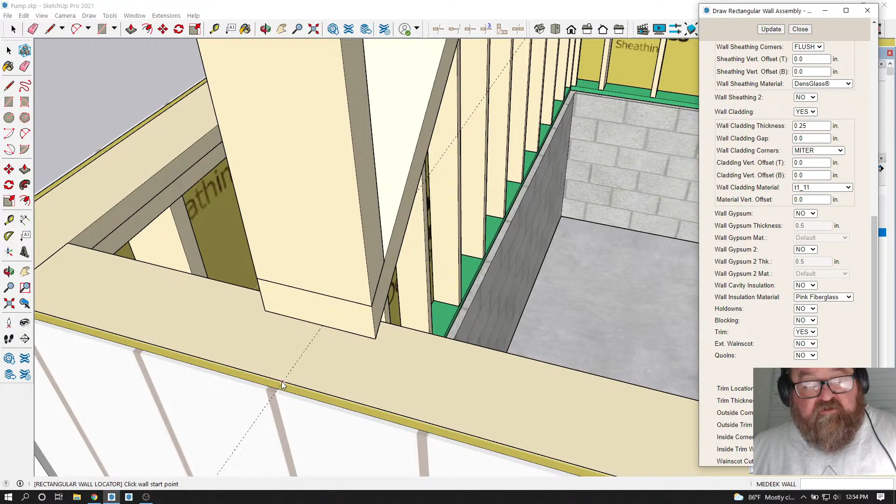And let's see, we want to use DensGlass, and where's our T111? Yeah, so all the other wall parameters stuck. Sometimes it'll save the wall parameters that you used before in this same drawing, which is handy. There we go.

Well, did he do an update? I've never noticed. Oh, wow, Nathan, that was awesome. Did you see it connect itself to the other siding? So that must be an update. You know what he did? I think what he did was in the update, he hid the lines. When you put one wall on top of the other, it will hide the lines there. So before you would see a line across there where the siding changed over, which is actually, in this case, pretty cool. But what is this thing?

I think this is left over from that other wall that I deleted. Yeah, so that's cool, that is awesome. Let's turn our roof back on. Yeah, now see, now we're getting someplace. Do we have any other comments?

Nope. I've got new energy though, so now I'm going to go ahead and put these other windows in because now I'm all excited. I remember this was 4'9" and 5/8. Yep. I think he's going to like this because this all makes more sense.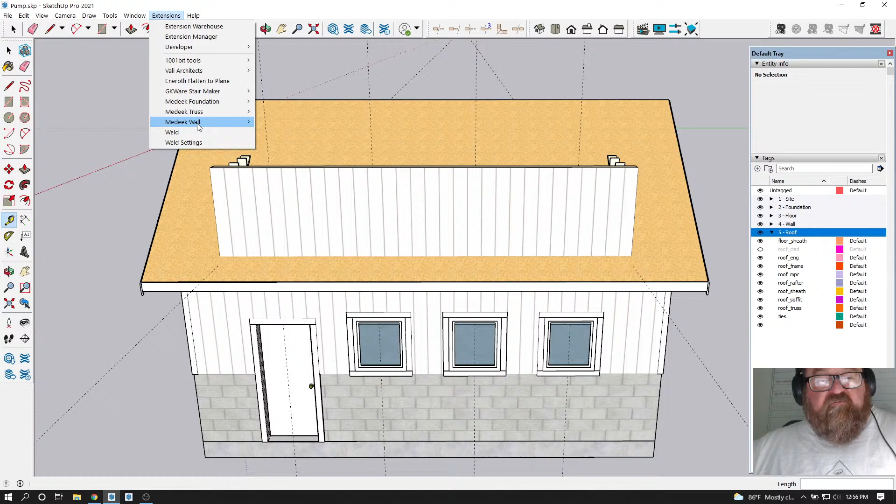So now if I go back and put my windows in, I've got 32-inch wide windows just like below, and let's just make them 36 tall just like the others. Update that. And this wall header height is going to be, let me guess, 56. It needs to be about 42, 43 inches. Let's see what that looks like.

Oh yeah, oh yeah. Oh baby. Yeah, that's gonna look good.

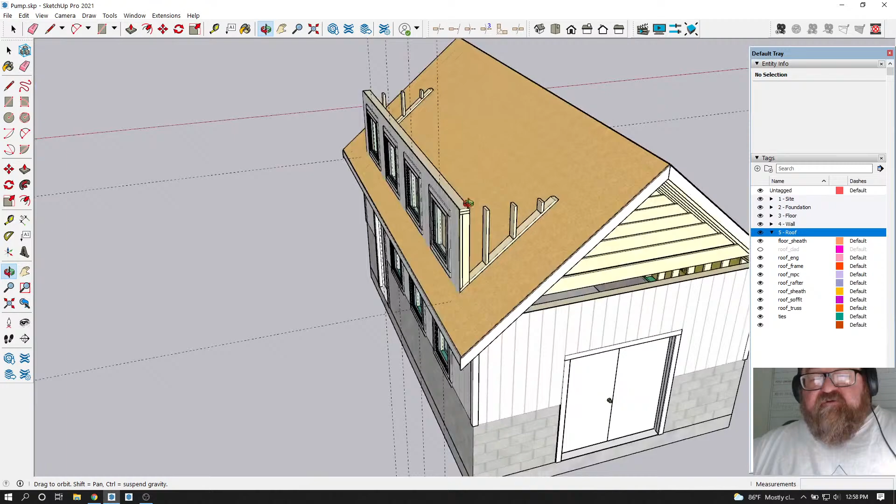Awesomeness. Now what we can do is do a shed roof, and we're combining parts of the extensions now. Let's turn our sheeting off for a second.

Actually, let's turn it back on. Now what I'm going to do is a shed roof, because I know we can do shed roofs. Shed roof, roof rafters. And we're going to go from here.

Let's see... oh, gotta do that first. I forgot to check.

I need to see what that's, that's why I was going to turn the sheeting off. What my length is. The length is going to be...

I might have to experiment with this a little bit. To right there - what was it? I forgot to look and see what the length was. Dang it. Yeah, I think it's 1 inch, yeah.

So what we need to do, I'm going to leave that line there until I get this figured out. So let's go here: truss, roof rafter, shed dormer, shed roof. And we want to go from here to there.

And then we want to go... so why did it turn around? Why did it turn? That's weird. Okay, so we'll go...

From here to here. And then go. Alright, you got to make up your mind, Mr. Extension - which way do you want to go? I don't quite understand why it's doing that.

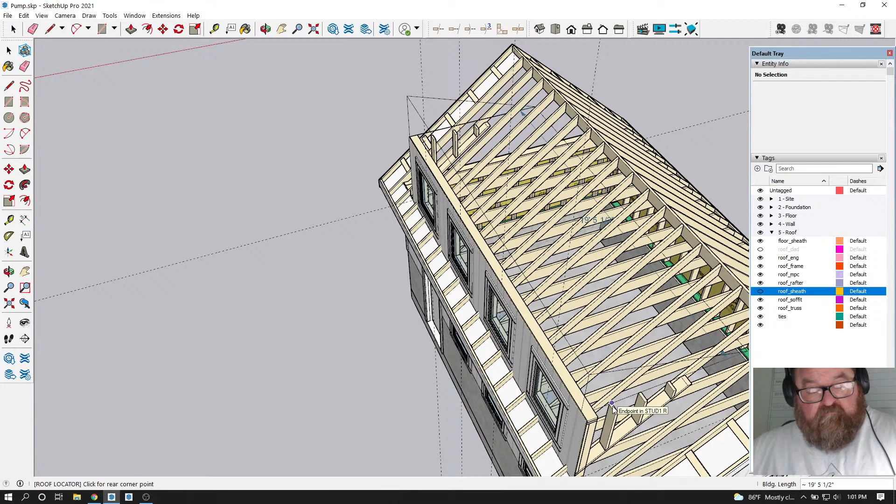I can start from this end, I guess. But I don't know how far.

Let's go back and look at the parameters on it, see if I can make it go from right to left or vice versa. Maybe I can change it once I can see the parameter. You see the way I'm drawing it now, the outline of it is shaped right, but for some reason, as soon as...

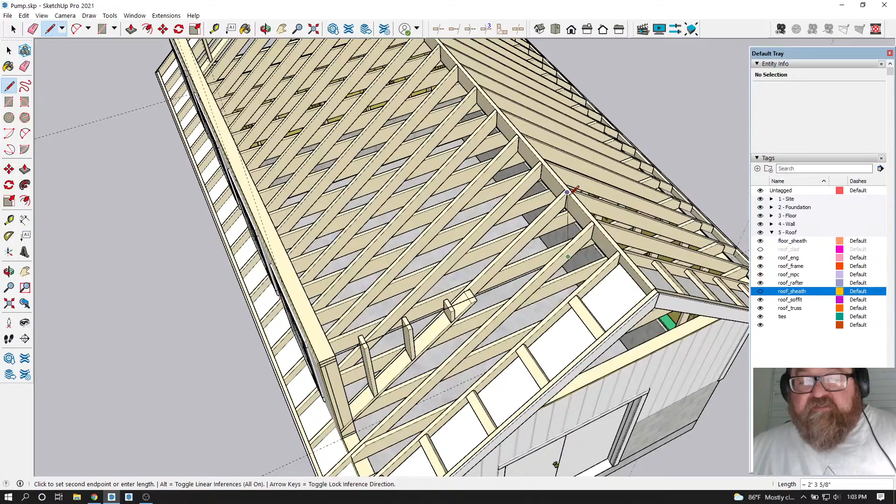That's weird. So what we want to do is we want to start from this end. I thought I had started from that end before, but I just want it to go to this ridge right there. I don't want it to go any further than that.

So what I'm going to do is start over again, since it is easy to do. We'll do our shed roof, okay, and I'm going to go from there to there, and down to here. Okay, so I've got it going right this time.

I guess you can't change it from left to right, like when you're doing your studs, you can say start from the left or start from the right. But on this, you got to do it this way.

So roof pitch, let's go 3, because I think that's what it is. And we'll just say rafter depth is 5.5. Bird's mouth, 3.5. We don't have an upper, so we'll leave that at that.

I'll probably have to alter the ends of the rafters. No ceiling joists. Rafter depth, okay. And same as rafter - 24, we want 16-inch spacing.

And gable rafter depth. Yes. And we will make this cladding. I don't get to specify the roof cladding.

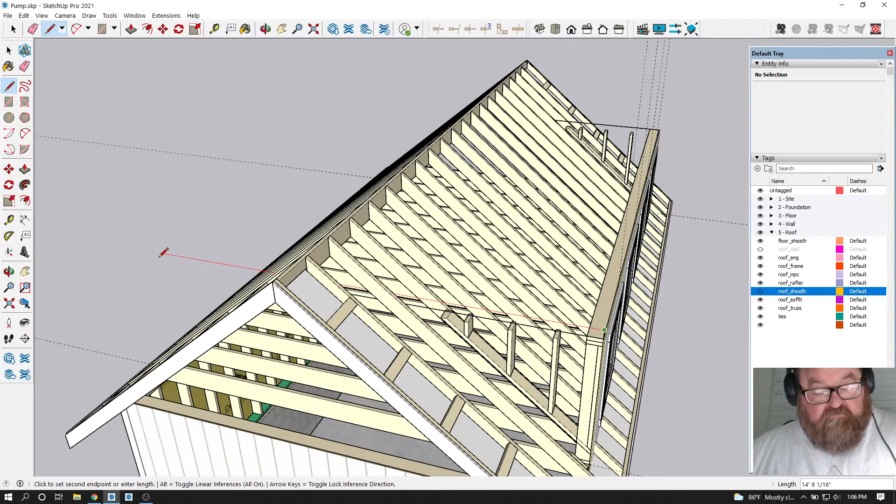So if I come up, say 3, let's see, 3.5, 3.5, and then I want this to go to here, and then I come up straight, and then I go down to here. Did I get that straight? Yeah.

I'll delete that, and that. Oops.

I was really just trying to demonstrate some of the power of the extension, but at some point I have to get some production made, you know. And so...

Let's see, this is going to be 10.5. Here's the edge of my thing.

So that means this will go to there. Get rid of that, and that. I'll draw myself a bird's mouth in here. I already had one, didn't I?

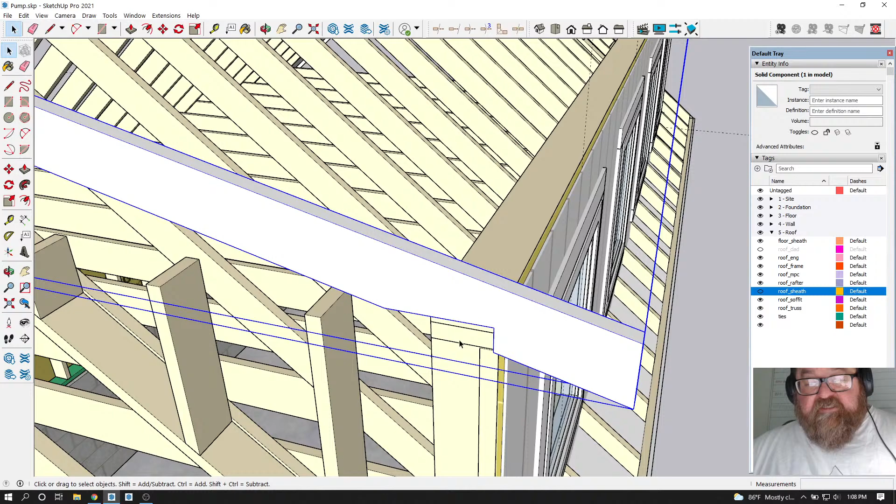Group. And what I'll do is make this a component, shed rafter. Then if I have to change it later, I can.

Yeah, that should go right there. And so if we go here, what we would want is for these to be beside these, like this. Oops, I didn't mean to copy it. Now I want to go 16 times 13, times 13. There we go. And then we would have, oh, I missed one, didn't I?

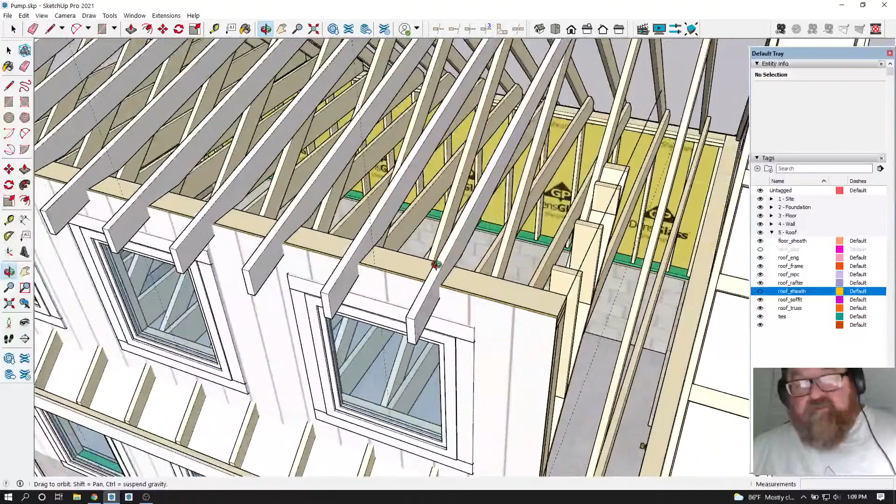Like that. So you see, that's how I used to do things manually. It's not a big deal as long as you're organizing things right, making these components, because I can already tell I probably don't want my bird's mouth to be that deep. I don't want this much rafter hanging down, and I can get by with about 1.5 inches of this plumb cut on this seat cut. But you see, I can fix that easily.

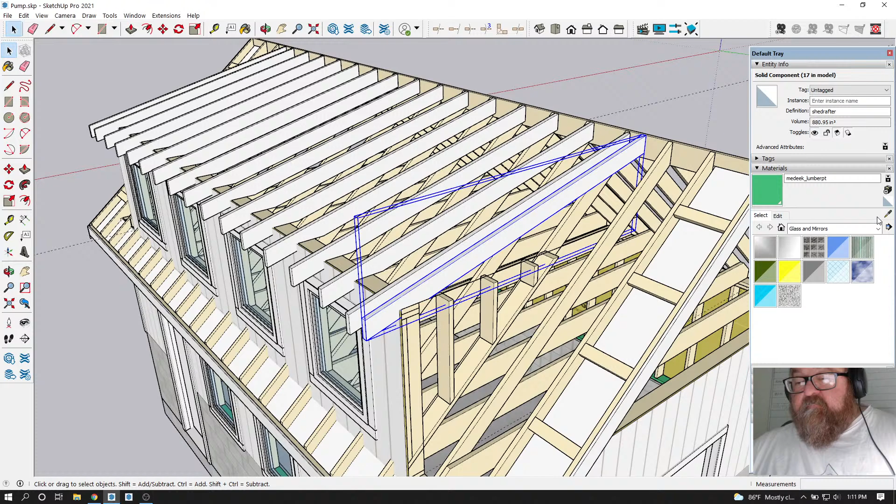Now I can even go in here and make these look the same by selecting this material, and then just making those. What I should do is make that a component. Yeah, if I go in here and select all these faces, and just do that, then all of them are fixed.

But what's bugging me is I don't like how deep the bird's mouth is cut out, so I'll end up fixing that. What I wanted to demonstrate was how I was going to do that manually and how easy it would be. Again, I haven't used some of the functions of the extensions, and I'm just trying to get more familiar with them, because eventually, once I learn better, I'll be able to use them and be more productive.

And of course, then we would have a rafter that's also 12 inches this way. We'd have an overhang, and we'd have decking. This is why I wanted to just take that rafter to the edge of that ridge board, because now our sheeting should line up.

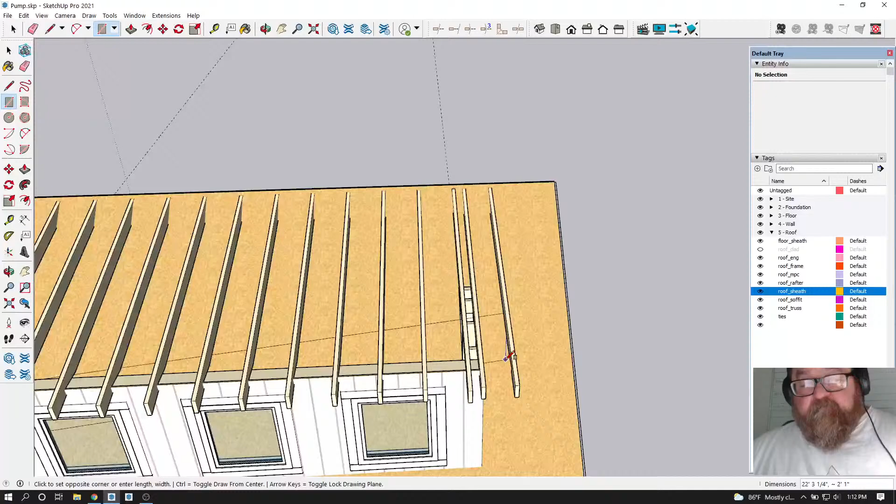And what happened? What happened there? That's weird. Got a rafter that didn't work out right. Well, where did that come from? Oh yeah, that's the rafter that's on layout, and then you have your house line rafter, which is flush with the end of the wall.

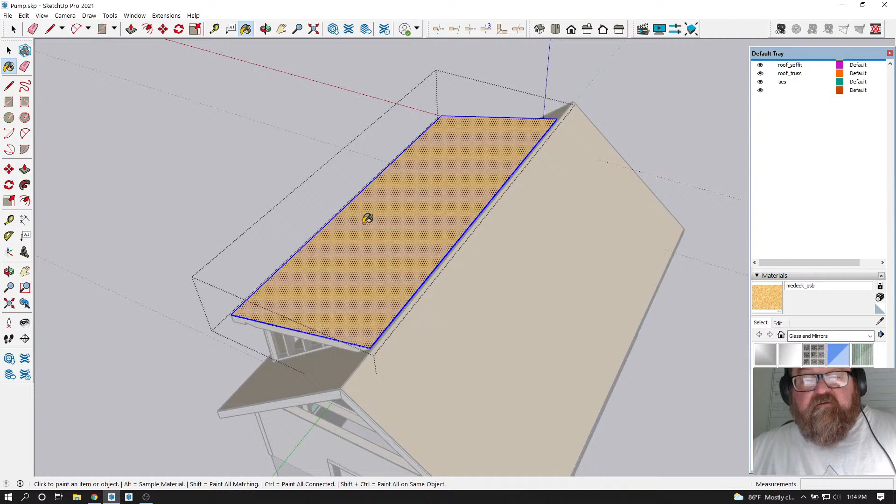So then I can pull this up, make that a group, then pull it up to here, like that. Then we can get our material, select OSB, select all of our faces, make that OSB like that. Groovy, it's starting to look pretty good.

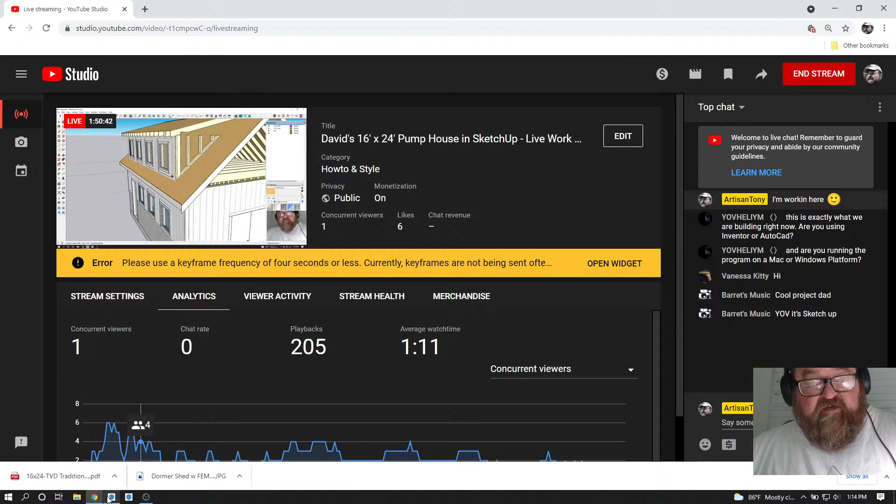Hey Barret. Yo, it's SketchUp. Yov. What kind of millennial speak is that? Wow, yo, it's SketchUp, yov baby. Barret is a great musician, my son should check out his channel, Insane Rhythm, Insane Drummer 89. Barret's Music is on SoundCloud. He makes all the music for my videos, like that previous video I did where the UFO popped up while I was working on a project. A UFO popped up, and I made a video about it using his music. Coincidentally, he had a filmographical tune called Aliens. That was pretty cool.

So now all I gotta do is go in here and cut out this decking and all the rafters where the dormer lies. But what I'm gonna do is take a little bit of a break. My left hand that's always doing the same thing over and over needs a break. I'm getting carpal tunnel after 30 years of drafting.